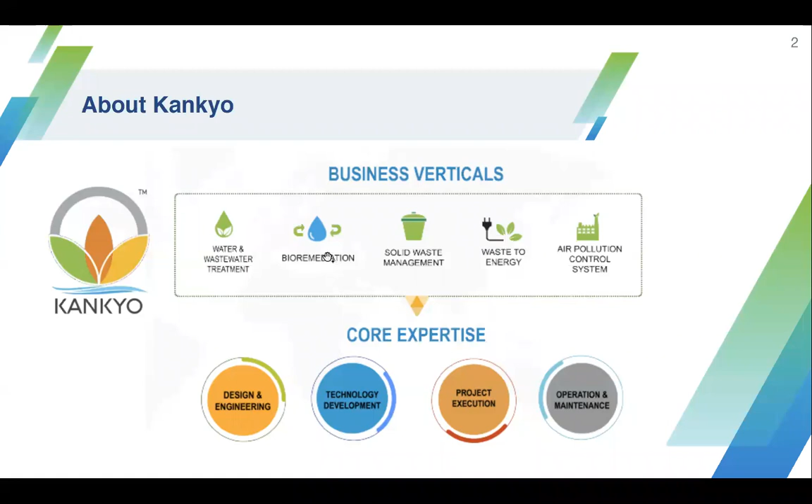Today my core focus would be on a few areas. I would be running through a little bit of basics on wastewater microbiology, because we are going to talk about smart solutions. So we need to understand how the microbiology works in wastewater treatment, and how effectively we can harness it for different streams of wastewater.

The other focus, when we talk about smart, is always connected to sustainability - that's energy optimization. How we could optimize the energy in the total treatment. We'll be talking about those aspects and approaches, and also about some technologies which you must already be aware of, and some which must be new to you.

We'll be talking about these technology approaches for different wastewater streams. Then we have smart monitoring and control of all these systems - the essential controls and remote monitoring which are essential for running this plant efficiently. So I'll be slowly going through these steps: starting from wastewater microbiology, then energy optimization, technology introduction, and smart monitoring and control.

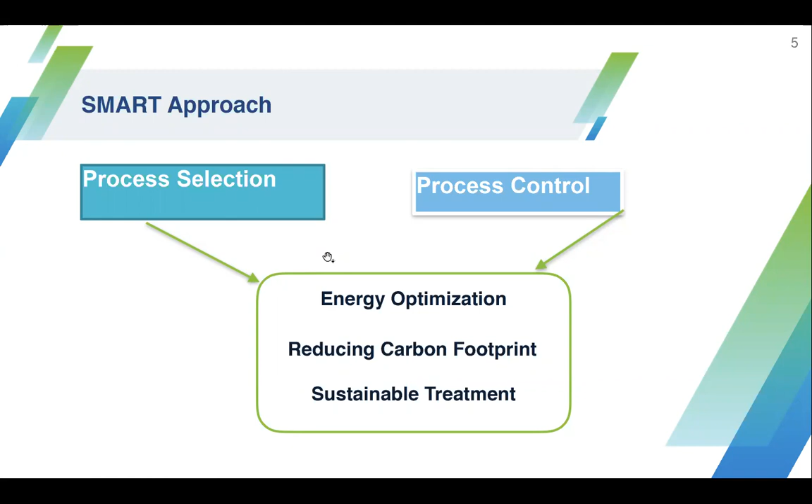The entire goal is to have lesser operational expenses, so reduce your energy consumption. Energy optimization is one of the core areas, and reducing the overall carbon footprint of the wastewater treatment system, ensuring consistent performance and achieving sustainable treatment. This is the smart approach we have to focus on.

Now, coming back to understanding the wastewater — the wastewater anatomy — it has different components. If you take a wastewater treatment system, it has a lot of mechanical stuff, and civil components in the form of tanks and foundations and all those things. Electrical is involved, instrumentation is involved, and chemistry and biotechnology, so it almost covers all engineering disciplines in wastewater treatment.

Each one is dependent on the other. If the mechanical system is not proper, it will affect the process. If the electrical system is not working properly, the process gets affected. If the instrumentation is not there properly, you cannot monitor the system. So all these things are interrelated, which are very much essential for any wastewater treatment system to perform well.

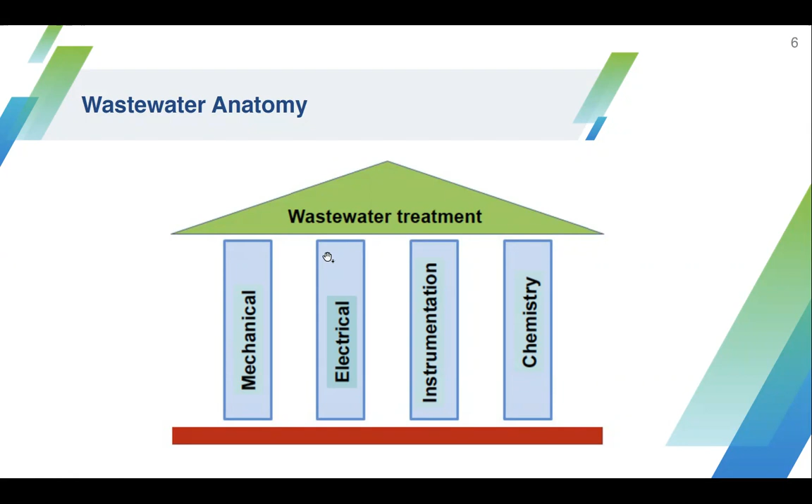Coming back to the families of microorganisms, there are a variety of microorganisms in wastewater application. We won't go deeply into the different types, but we'll just see the overall picture of what's available.

The broad classification is aerobic microorganisms, which are quite common. They need oxygen, and the pollutant is consumed as food along with some nutrients. The end product would be stable solids, carbon dioxide, and water. This is basically called the aerobic process.

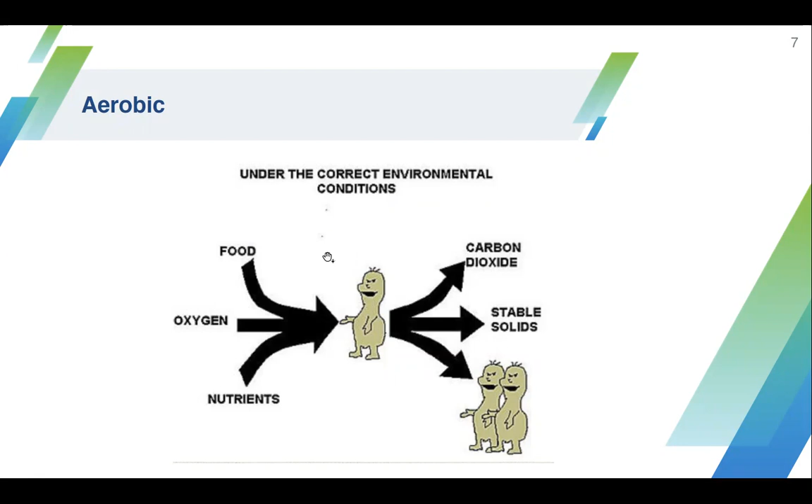The microorganisms thrive in an aerobic environment. Anaerobic is quite contrary to that, where there is no supply of oxygen into the system, entirely in the absence of oxygen. The microbes convert this food into methane, some solids, and carbon dioxide. This will be the end product for any anaerobic treatment system.

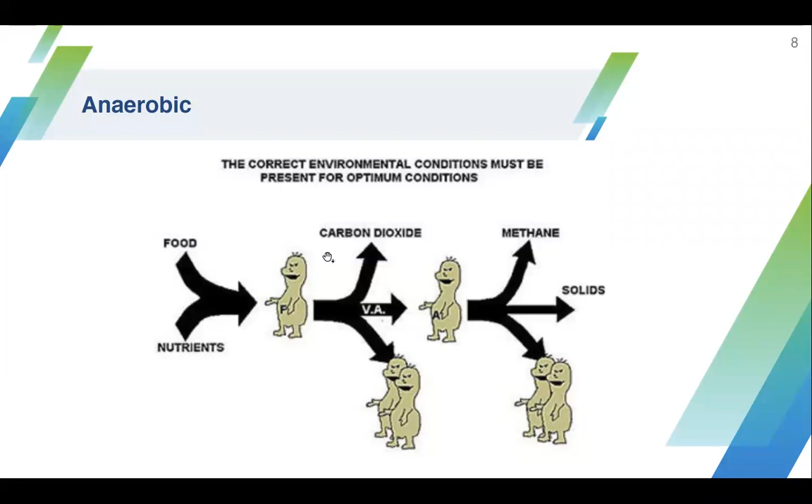In aerobic and anaerobic systems, anaerobic systems are pretty slow to stabilize, while the aerobic process is much faster in stabilization. When adopting these two technologies for a wastewater treatment plant, we have to see the limitations of both, because anaerobic microorganisms are very sensitive - if something goes wrong, the plant stabilization time takes much longer. So we have to properly evaluate the usage of anaerobic treatment systems, and the same applies for the aerobic process.

Facultative microorganisms can survive in both environments, aerobic as well as anaerobic. They need food, nitrates, and nutrients, and finally it gets converted into carbon dioxide, nitrogen gas, and some stable solids. These are facultative types of microorganisms.

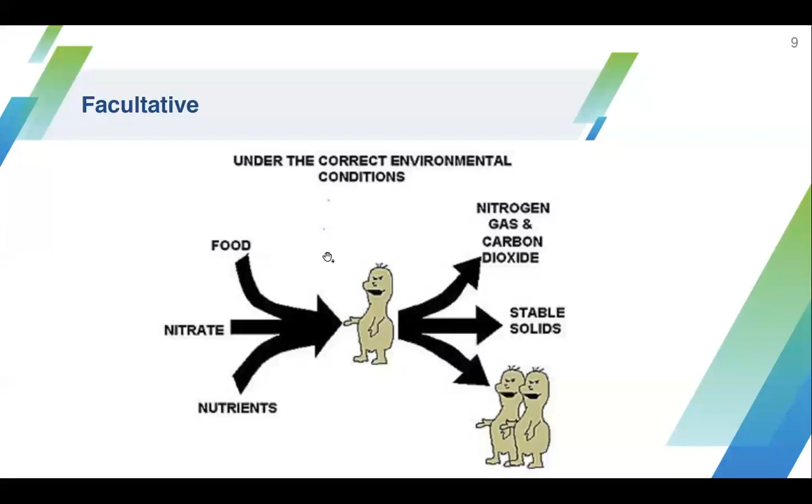If you look at the bacterium process, there are three steps involved. First is carbon intake and ingestion, since the basic molecule is carbon - that is the basic energy consumed by the microorganisms. This is used for a process called catabolic activity, which is breaking down these carbon chains and converting them into a final product of CO2, for which oxygen is also required. This path is what we call the catabolic path.

The energy generated in this process is utilized for the growth of new biomass, a process called cell synthesis, or anabolic activity, which also gives out a lot of heat. This catabolic and anabolic activity together is what we call metabolic activity. For balanced metabolic activity, both these functions have to perform well.

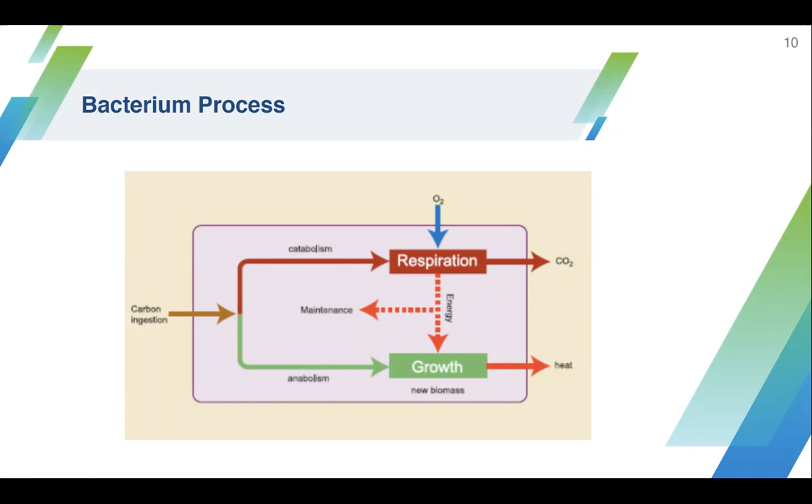As far as treatment is concerned, the aerobic process is a typical example where a lot of energy input is required in the form of oxygen for the aerobic microorganisms to survive, and a lot of biomass is produced. For around 100 kgs of COD, you get about 30 to 60% biomass based on the nature of the wastewater, and the rest becomes carbon dioxide and a lot of heat. It's an exothermic reaction, so there's a lot of heat loss as well.

There will be an overall very good reduction of organic pollutants like COD - from 100 kgs you can bring it down to 2 to 10 kgs. That's a major advantage. For anaerobic systems, from 100 we can bring it down to around 15 kgs, with lesser sludge generation. We don't require external energy in the form of oxygen since this happens in the absence of oxygen, and it gives out a lot of energy in the form of biogas, which is a fuel that can be used for thermal application or power generation.

We have to find hybrid solutions in certain wastewater treatment streams if the organic load is heavy. Assume you have a very high organic load - if you go only with an aerobic system, yes it works, using multiple stages of aerobic systems, but the energy consumption would be very high, making it uneconomical. So usually when the organic load is very high, you start with anaerobic microorganisms, because they are pretty hungry microorganisms and need a lot of organic load to survive.

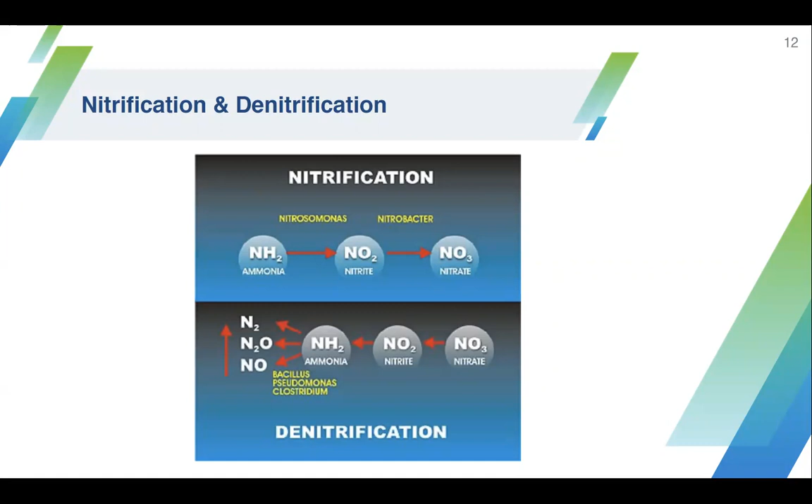There is another important one: biological phosphorus removal, mainly for the phosphorus or phosphate present in wastewater. You might have seen that much sewage, whatever is being treated, is let out into water bodies, and you see a lot of algae formation. This is mainly because of eutrophication, caused by high phosphate content, which mainly comes from the surfactants we use, mainly from detergents and soaps.

In everyday life, you use these detergents in vast quantities, and they get into the water bodies, because currently none of the treatment systems have phosphorus removal in India. This has become very vital, because now the water body is getting polluted, aquatic life is lost, and all those things.

So here again, there is a different family of microorganisms, a combination of anaerobic and aerobic microorganisms, which together can reduce phosphorus by biological means. Any anaerobic system, during fermentation, produces a lot of VFA, volatile fatty acids, and these are converted into energy rich products.

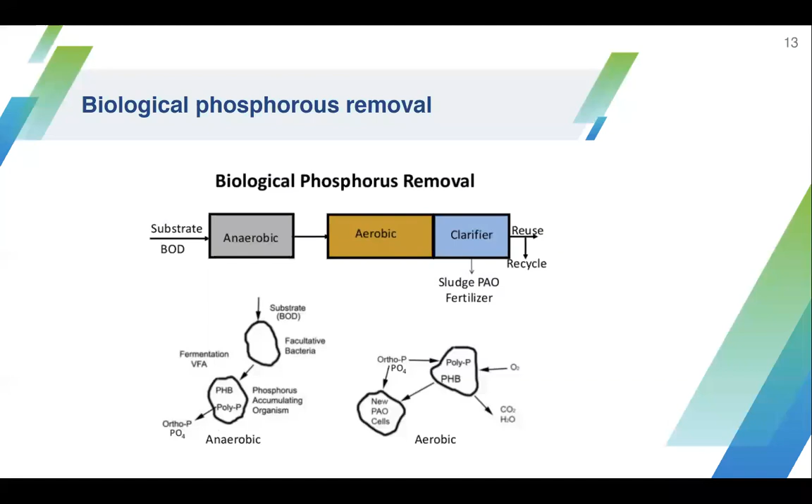So both these things put together, nitrification, denitrification, and phosphorus removal, we call this as biological nutrient removal systems. Not only BOD and COD, now in the European context BNR is quite famous, but in the Asian zone it is not quite familiar. Now many plants have to incorporate this BNR as well, biological nutrient removal systems, which removes the total nitrogen and phosphorus.

Now, if you see the growth pattern of any microorganisms in our wastewater treatment system, it goes through 4 phases. These are very, very important phases.

The initial phase is what we call the lag phase, where when you commission from day one, we call this the lag phase. The system, your microorganisms will get used to the pollutants. There'll not be increase in living organisms, but whatever organisms are present will try to accommodate to that particular environment. So this is called the lag phase.

Once the environment is quite familiar for these microorganisms, then it starts multiplying. This is what we call the log phase. You can see an exponential growth phase happening, which means there'll be a lot of growth of microorganisms multiplying. So here is the actual reduction of all your organic pollutants happens.

So this is what we call stabilization. When we start, we say that stabilization time is 2 weeks, 3 weeks, or 2 months, so that depends upon this phase. Now, once it reaches an optimum level, we call this the stationary phase, which means there will not be any further growth, there will be cell division, and there will be an equivalent number of death happening.

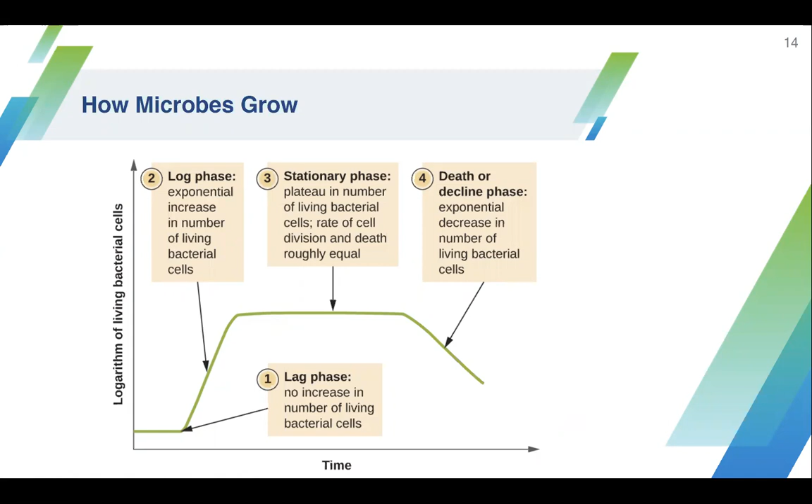So the faster you stabilize, the better, so you should go for the right process for that particular wastewater, considering the type of pollutant present, so that you can save on all this. We can make the process faster in some cases, and in some cases we can also optimize on the energy consumption.

So typically, if you take any wastewater treatment, it has to go through this scheme, where it will have a preliminary treatment to remove the screens and grits, and then a primary treatment to remove all the sediments, and then you go into the aeration system, where actually the BOD, COD, everything is getting reduced. In the secondary clarifier, sludge separation happens, and we activate the sludge back inside the process. Tertiary treatment contains the nutrient removal, biological nutrient removal, like total nitrogen and phosphate. And then tertiary treatment can also have other polishing systems like filters.

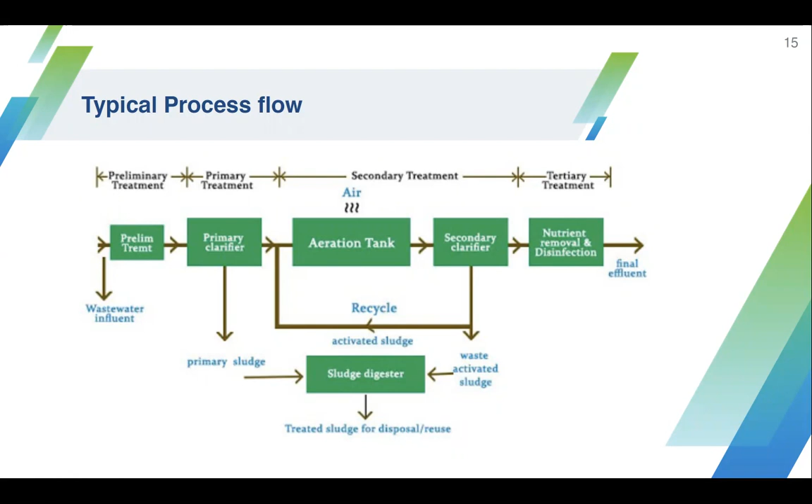And sludge which is taken out goes for disposal, or converting into a useful resource, or going for a sludge digester, where we can digest the sludge. Now, this is the new norms that we have in India now.

There was a lot of debate going on, but now the latest notification says that you have to comply, because many water bodies are getting polluted with heavy sewage inflow. It has been revised that ammonical nitrogen should be less than 5, total nitrogen less than 10, COD to the tune of about 50, and BOD up to 10 needs to be reduced. There's no mention of phosphate, but for water bodies it's very critical, so we have to bring it to less than 1 milligram per liter of total phosphates.

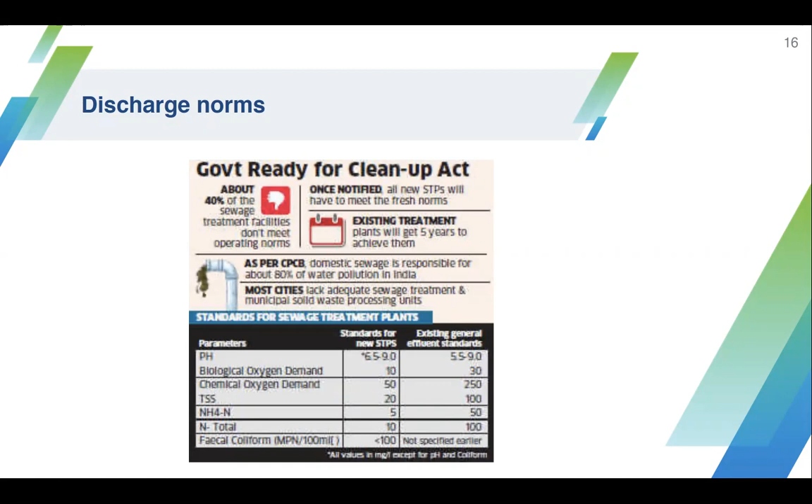Now if you see the energy spectrum in wastewater treatment, it's like this. The blue color one is for the aeration process, so 56% of the energy is consumed in the aerobic process. This is very vital, so you have to focus on this area so you can substantially save energy, or optimize it, because certain processes require that much energy, but we always have the option of optimizing energy consumption in this area.

Then you have the other pumping systems, and the dewatering stage. The violet color, about 7% of the energy, is consumed in handling the sludge - how to handle it, how to dispose it, dewatering and disposal, which becomes one of the important factors. Then there's the pumping cost - primary clarification, sludge pumping forms the rest.

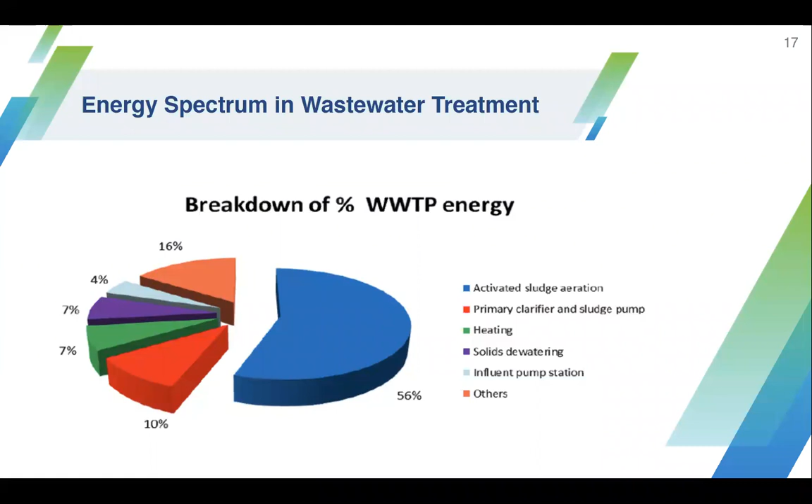So the core focus should be on technologies which could reduce energy, because this is very vital - it's not only cutting down expenses, it's also reducing the global warming potential, because the more energy you consume, the more CO2 you put into the atmosphere. So any treatment solution should also focus on contributing to the environment - not only reducing pollutant levels, it should also reduce emission levels, direct or indirect.

Now we are going into the next part of the presentation, where we are going to see about the various methodologies and technologies which can be adopted - simple solutions and simple technologies, and upcoming technologies which can be effectively implemented.

Now if you see equalization - whenever wastewater is collected, it goes into a collection tank. But it's not a simple collection tank, we call this an equalization system, because anything put into the tank should be homogenized - equally, because if you take an industrial scenario, wastewater can come from different processes, and each stream can have different types of organic loads. But whatever you feed into the wastewater treatment system, particularly the aeration process, should be a steady flow - only then do you get a steady output. Otherwise there will be a lot of variations, so you need to properly equalize the entire effluent within the tank.

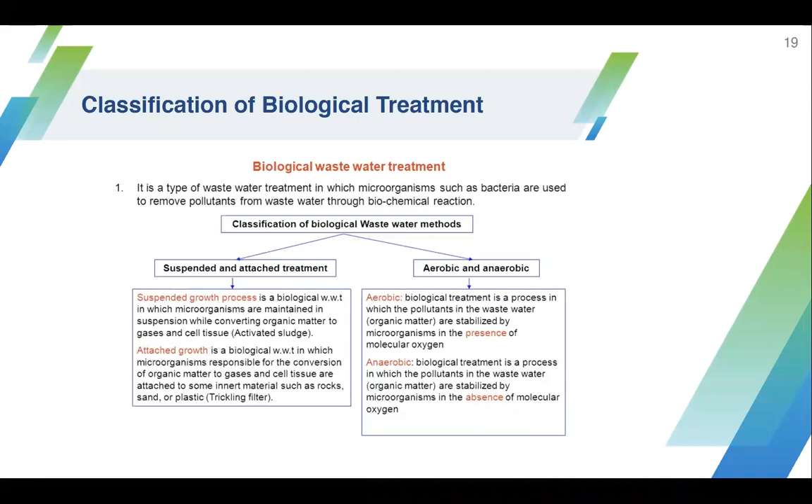On the types of technological approaches for different types of biological processes, basically we have only two broad classifications: suspended growth and attached growth. In suspended growth, microorganisms remain in suspension and consume the organic load, thereby reducing BOD and COD. In attached growth, the microorganisms are not in suspension, so they attach to a biocarrier and grow on that. These two types of systems can be applied for both aerobic and anaerobic processes, so broadly all technologies fall into this platform.

In the aeration process, we use many different types of diffusers, right from an ordinary pipe with perforations, which gives a very coarse type of bubble, to specific diffusers with slightly smaller coarse bubbles. Anything in the range of 3 to 50 mm is called coarse bubble aeration. Coarse bubble is mainly given for mixing, not aeration, because it has very low oxygen transfer—smaller the bubble size, better the oxygen transfer. Coarse bubble diffusers provide good mixing, whereas fine bubble diffusers may not mix well but have very good oxygen transfer. Within that, there are different types—up to 3 to 5 mm size, 5 to 50 mm, and over 50 mm—depending on the nature of the wastewater.

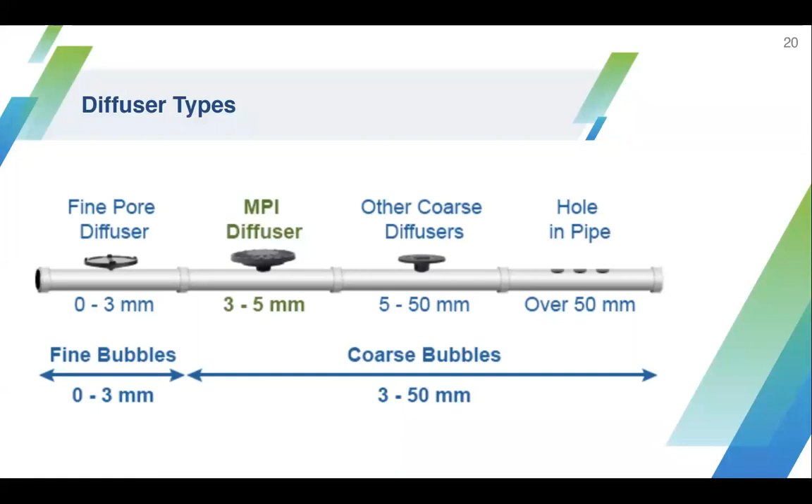Then comes the main aeration system, where people normally use fine pore diffusers with less than 3 mm bubble size, used for diffusing oxygen into the system. These are the basic diffuser types normally used. There are other systems like submersible aerators, which are different. These are all what we call EPDM diffusers, membrane-based diffusers, or a simple pipe with perforations.

In an aeration process, the control of air is very vital—you cannot put more or less air, as each has its own effect. If you put less air, the microorganisms won't survive and will die. If the supply is too high, too much bacterial growth will occur, and there won't be enough organic load relative to the microorganisms, so the bacteria kill each other and die. There should always be a sufficient air supply, so control of air or oxygen in an aeration system is very vital to determine the process parameters.

We may size the air blower or air compressor correctly, but it may still not perform well. It could be due to low organic loads, or excess air being pumped in—many factors are involved. So control of air is very essential in a wastewater treatment system.

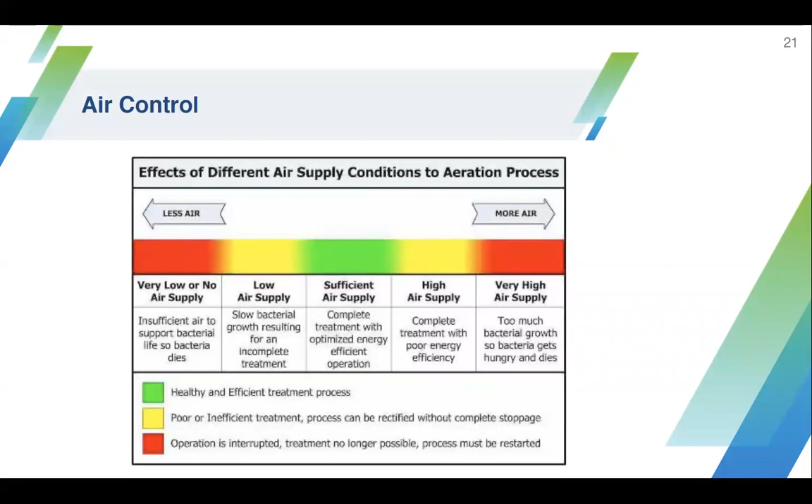Now here come some technological innovations called hydrodynamic aerators. Usually any aerators placed under water have to meet severe conditions, like scaling, clogging issues, and so on, and the replacement frequency is pretty heavy for all these diffusers. If you go for EPDM diffusers, they need to be replaced every year, otherwise you won't get the performance—you have to remove the old diffusers and put new ones in every year. So the life cycle of these types of diffusers is very short, which is where hydrodynamic aerators come in.

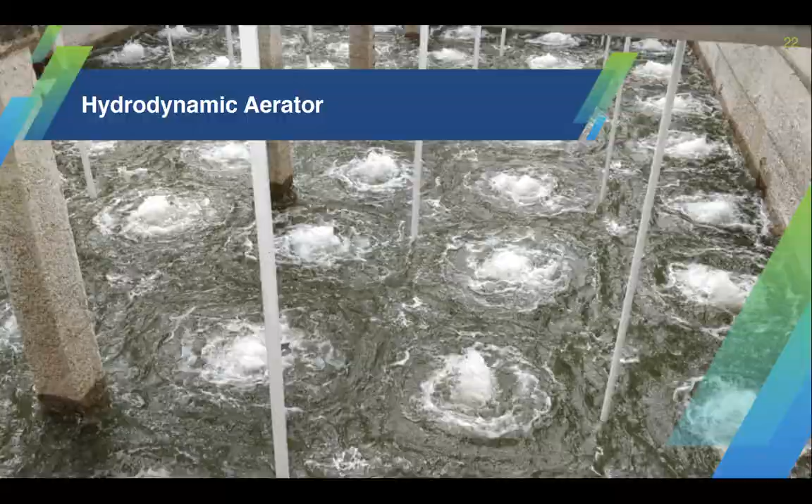Before going into that, there are a few problems I'd like to highlight regarding conventional diffuser issues.

If you see, it is like an elastic with small pores, so when you blow air into these EPDM diffusers, the pore opens up and bubbles are created which go up. Whenever the bubble rises, the water pressure on top pushes the bubbles, so there is additional strain onto the blower. Also, because there is a thrust happening in this area, there is a negative pressure created due to this lift, and the sludge also gets into it.

In course of time, this closing and opening, like an elastic band, has to regain its original position, but it will not happen. So at some point it gets clogged or it always remains open, and that's when we say this diffuser needs to be replaced.

What also happens is that when you start with fine bubbles, slowly it goes into a medium bubble, then it becomes a coarse bubble, meaning from 2 mm size it goes as high as 50 mm size. So effectively your oxygen transfer efficiency drops down drastically. You'll be consuming the same amount of energy, but you won't get the results because of this effect.

Many plants don't replace these things. They run for many years even if it's not working. If you just stand on top of the aeration system, you can see one part of the aeration is nice, the other part shows a lot of bubbles like a bomb explosion, which means it has already gone. It's just a vibrant turbulence you will see in that area, which means the tube got punctured, and they don't replace it.

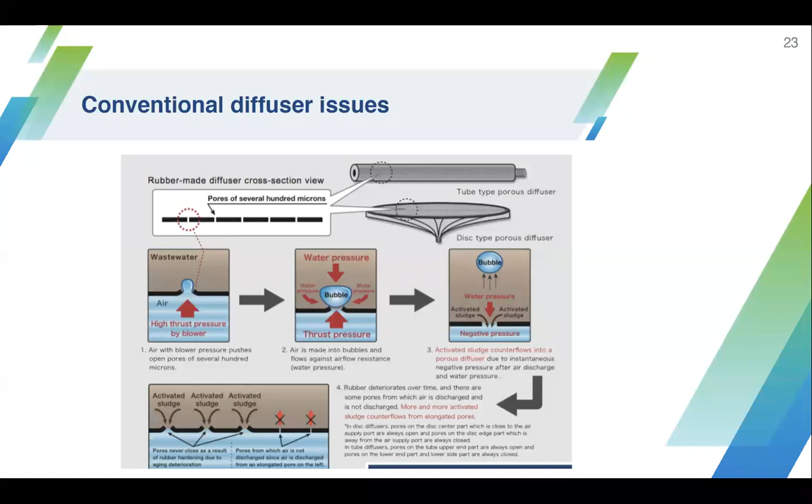Another important problem is when the plant is running, it becomes very difficult, because diffusers can be retrieved using a mechanism and all those things. But placing it in the right place will have complications, because unless you drain the tank, you cannot fix it properly. These are some of the practical issues with the diffusers.

There's also a lot of clogging which happens because of salt content or iron content present, and this puts a lot of strain onto the blowers. The resistance keeps on increasing, 200 mm water column every 10 days. So within 10 days or 1 month, everything is gone, and we have to throw these diffusers. If you try to use this, there'll be a lot of back pressure which will affect your blower. So a lot of issues keep coming in.

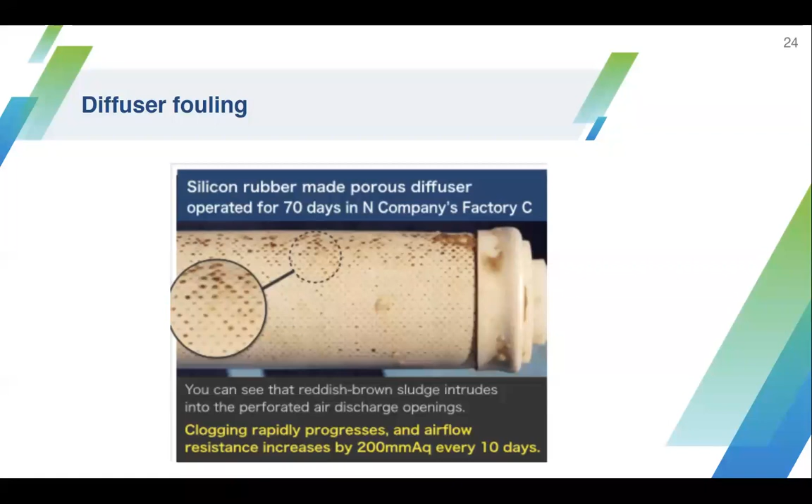Now, this is one of the innovations, what we call hydrodynamic aerators. Predominantly it's produced and developed by Suzuki from Japan. It's a very effective aerator, working on a different principle. You can see there is a big mouth cylinder with cross blades, which we call a guide vane.

When air is purged inside, this creates a lot of turbulence. Whatever you see on the top, we call mushroom buds. This creates a lot of ultra fine bubbles, meaning there will be a lot of micro bubbles as well as nano bubbles created, along with a lot of turbulence.

As I told you, any aeration system should have proper mixing and oxygen transfer. The fine bubble diffuser has very good oxygen transfer but poor mixing efficiency. Mixing is also very important in an aeration system, not only the oxygen transfer - the transferred oxygen has to be dissipated throughout the tank, and that is ensured only by active mixing. In this case, very, very micro bubbles are produced, and at the same time the turbulence created also gives very good mixing in the tank. That is the advantage of this particular system.

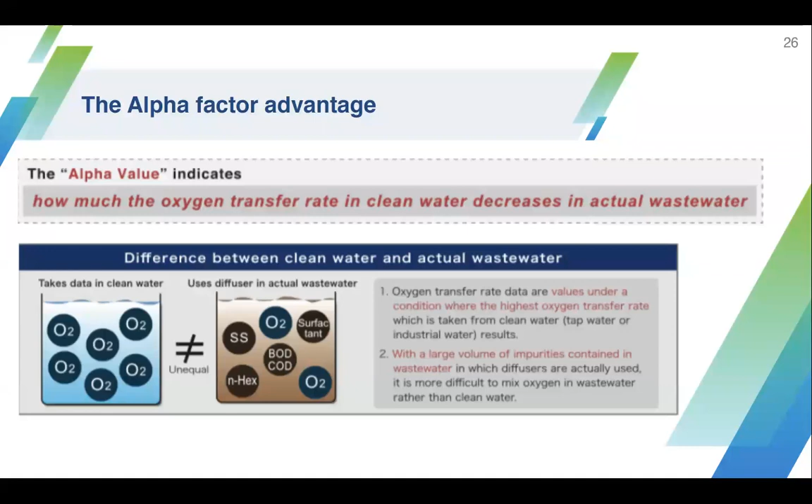For these hydrodynamic aerators, the alpha factor remains the same in water as well as in wastewater, so that is one of the main advantages. Whereas in case of other pumps or diffusers, it drastically drops down, it can go as low as 0.4 for different types of wastewater.

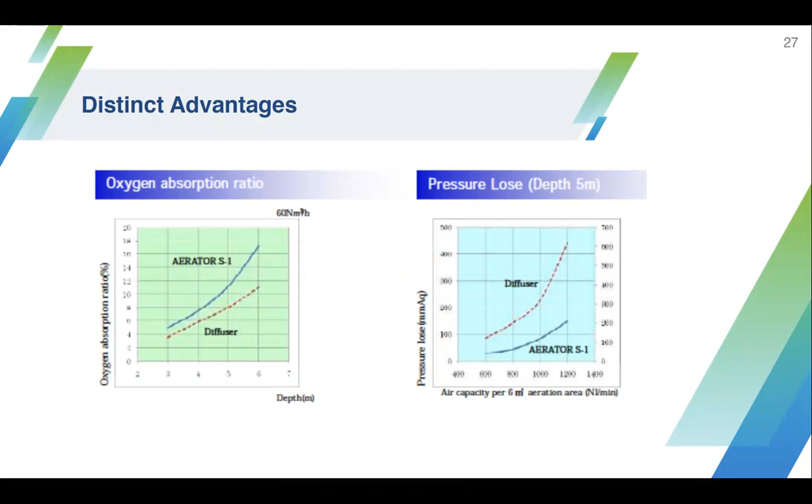Another distinct advantage is there is low pressure loss. In EPDM diffusers you have pressure losses, but these can be reduced when we compare to this aerator, and due to that the blower head size can be reduced, which reduces power consumption. There's also good oxygen transfer as you increase the depth, because one major advantage of these aerators is you can go for deep aeration systems, reducing your footprint.

So good oxygen absorption ratio, lower pressure loss, and longevity of this system, because once you put these aerators in the system, you need not replace them for the next 25 years. There are many plants working more than 25 years without any replacement or clogging, which reduces maintenance cost drastically. Imagine in 25 years you would have replaced all the fine bubble diffusers maybe 25 times. Though it is cheaper, if you calculate for 25 years, it would be almost 15 times or more the investment compared to this system.

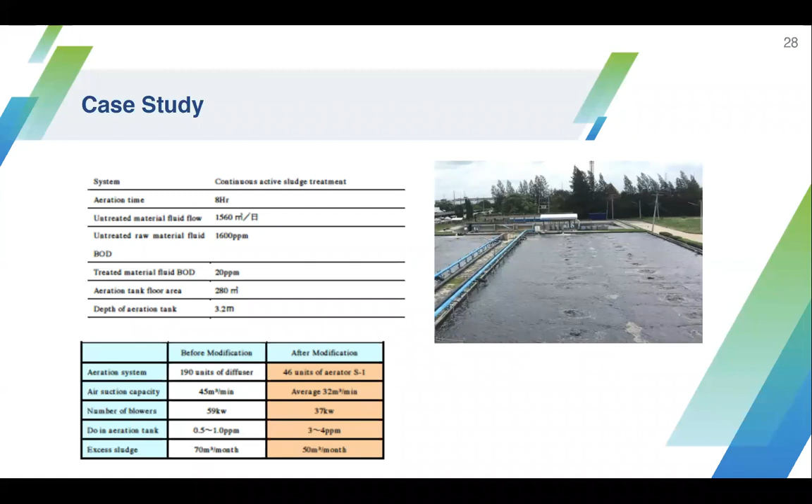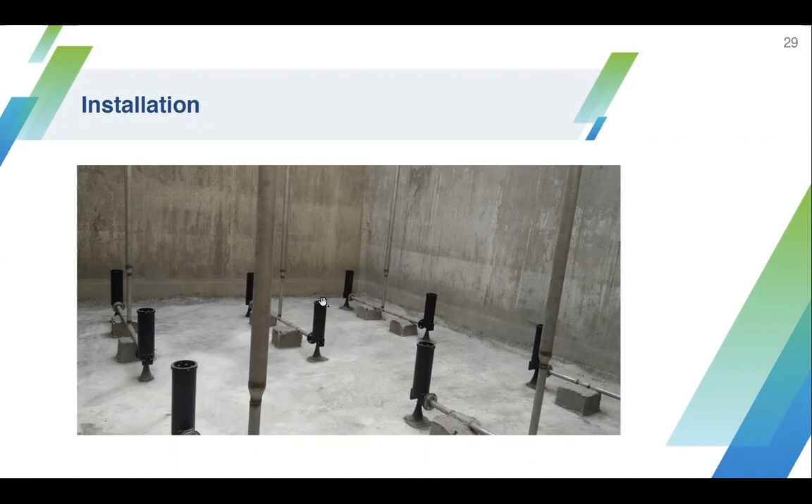So for any retrofit where you need an expansion or additional flow, we can retrofit with this type of hydrodynamic aerators, which are very simple to install and operate. These are typical installations, permanently fixed, and completely non-corrosive systems.

There are other microbubble generators which can also be a retrofit. So whatever we are talking about is a retrofit solution. It can be used in a greenfield project as well, but can also serve as a retrofit where you need to expand your wastewater treatment capacity or improve the performance of your existing systems.

Now, in many cases, like any aeration process, the tank should be deep, not shallow, because oxygen transfer efficiency, whether with conventional diffusers or any diffusers, improves with more liquid height, better performance. The oxygen transfer efficiency is directly proportional to the depth. So you should have very deep aeration systems, like 5 or 6 meters, that will be the ideal condition to get optimum oxygen transfer efficiencies.

Now, unfortunately, in many places in India, particularly for sewage treatment systems, they install it underground with just 2.5 to 3 meters liquid height or less. At that depth, there will not be any oxygen transfer. It simply wastes energy and money for operating the plant. Whatever you diffuse will just go into the atmosphere, like blowing air into the atmosphere. It's not really getting utilized.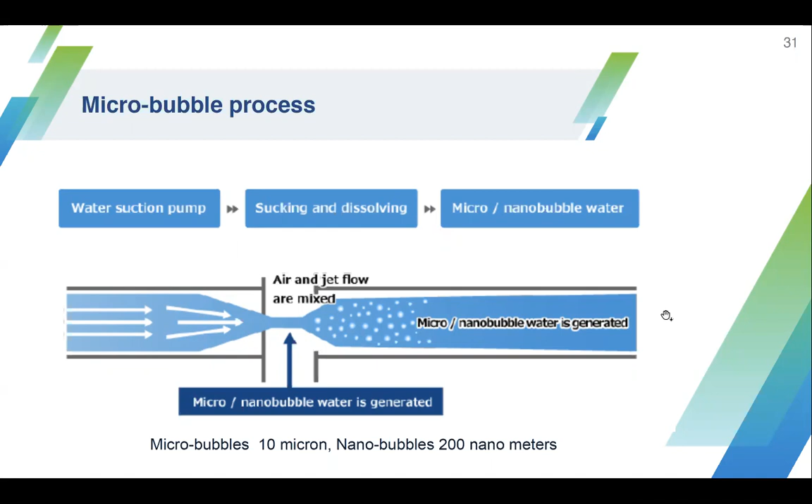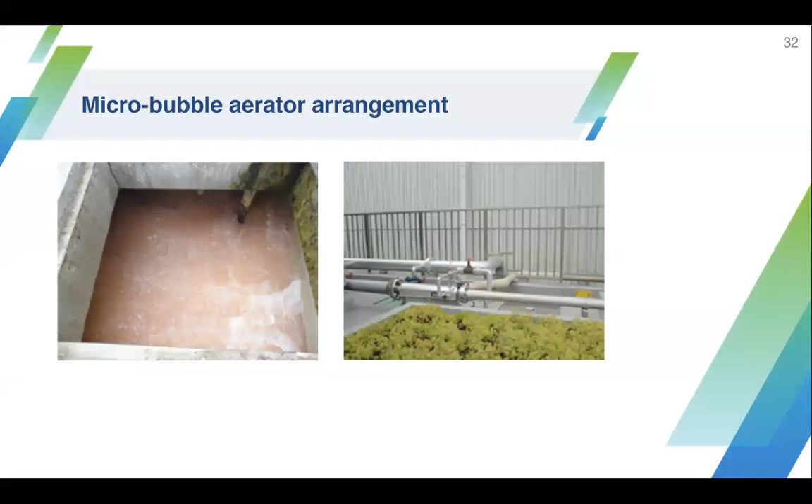So this can be effectively coupled along with your treatment process, which can be kept slightly outside, along with your blower. So it will have two combinations: the blower as well as the microbubble aeration arrangement. What you see is a dispersed growth. This is how the arrangement works, compared to the conventional system with just blowers.

Now where the HMB is introduced, it will dissolve around 160%, or 1.6 times, so improved oxygen dissolution happens here. Because of these microbubbles, more oxygen transfer happens, so energy saving is straight away up to 50%.

And if you see in shallow depths, with oxygen solubility using just blowers, for even 1.7 meter water depth, the oxygen solubility is just 2.7. It almost doubles when you go with this combination, to about 4.5. So this is one of the distinct advantages of this microbubble addition.

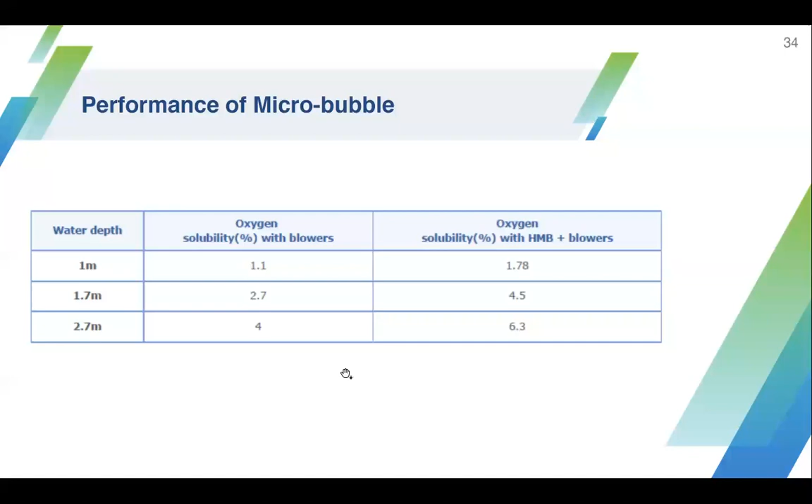Another important aspect of micro and nano bubbles is that they produce a dispersed growth of microorganisms. What is this dispersed growth? Normally in a suspended growth, you have floc formation - the flocs get formed around the microbial cell. What happens is the DO level, even if it's sufficient at this point, gets dropped by the time it reaches the microbial cell through the floc. So not enough oxygen gets into the microbial cell, but at the same time you need to increase this to improve the process. That is the main problem.

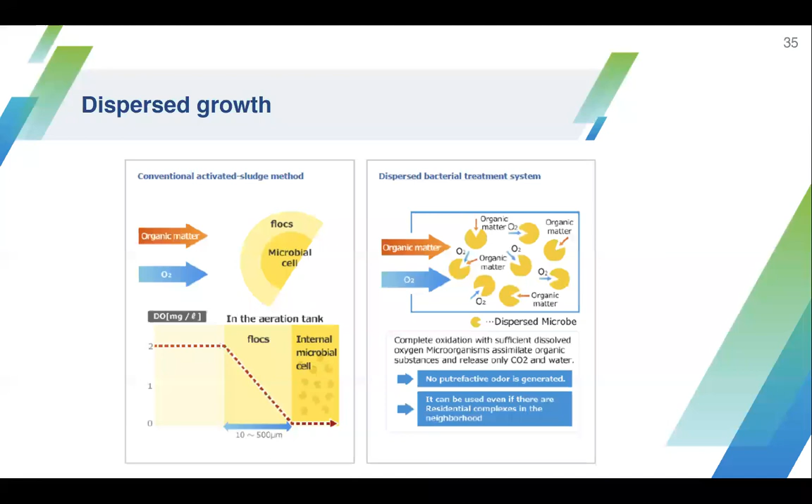But in a dispersed growth, there is no floc, so the organic matter directly gets into the cell. Throughout the aeration tank you see dispersed growth, and you don't require sludge settling and all those things. Directly the water can be pumped out, with just some filtration. All the organic matter gets dissolved. This is the advantage of these systems.

This is how it's a combined process, where you can see the HMB, a aeration tank - tank 1 and tank 2. This is tank 2 where we have the circulation pump, and the HMB can be kept outside. It picks up the oxygen from the atmosphere and puts it back, producing the microbubbles. And here we also have the conventional type of air blowers purging air inside.

So then further you can go for tertiary type treatments, and the entire sludge generation is also very, very less in these types of systems. So these are some of the innovations as far as the aeration process is concerned - smart technologies which can reduce energy consumption, and when oxygen is utilized properly, your sludge also gets reduced. So sludge wasting and expenditure on sludge management also reduces drastically.

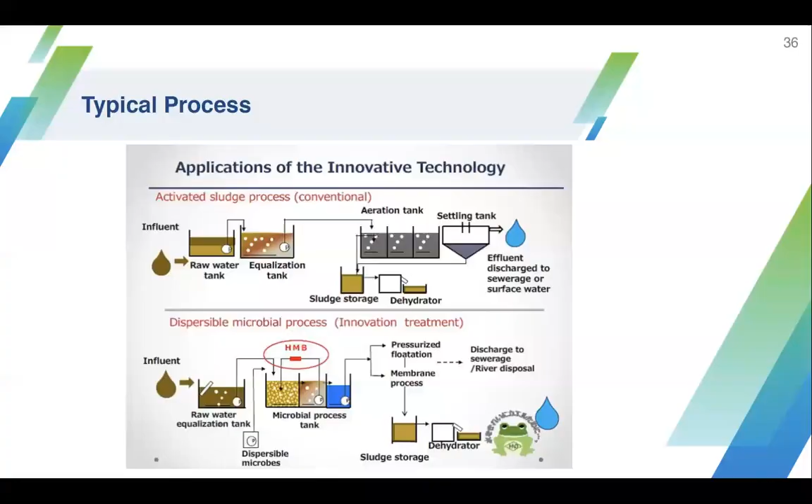Now coming to the biofilm reactors, these are some of the reactors which work on the attached growth principle.

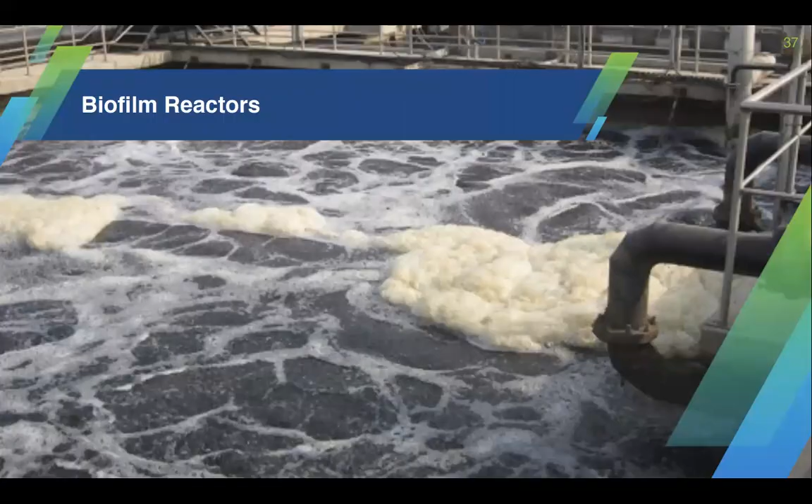Now, if you see this biofilm, as I told you, the microorganisms always try to attach to a surface. It's like dust settling on a glass surface. When exposed, all the dust gets settled onto the glass surface. In the same way, when microorganisms are exposed to a surface, they tend to attach and try to grow. It has various stages, because the attachment will not happen immediately. Whenever the microorganism comes, it will attach and detach immediately. We call this a reversible attachment.

So it takes some time to get attached to it. Then the excretions from the microorganisms will ensure that a cluster of microorganisms is formed onto the surface of this biocarrier. That's how it builds up. Once the accumulation happens, it comfortably sits here and tries to consume all the organics.

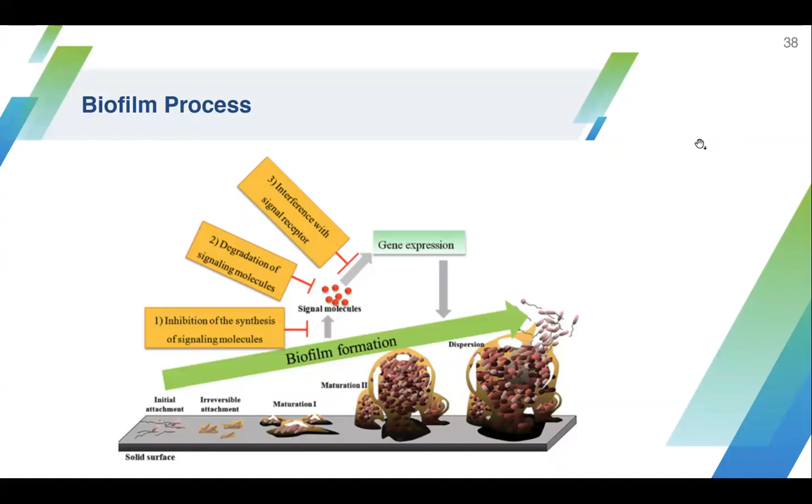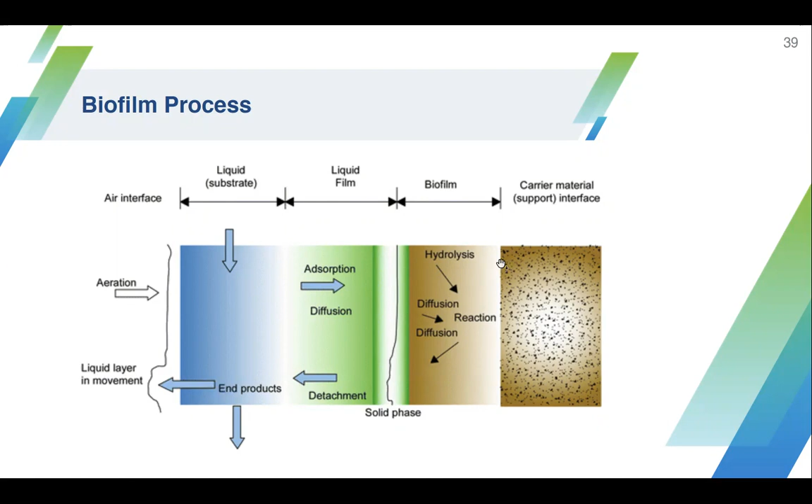So the advantages of any biofilm process as compared to suspended growth systems is it's very compact, because it can have very high bacterial growth, and it can also resist shock loads. This results in effective reduction of sludge. Sludge generation will be just 50% of the conventional activated sludge process, because a higher amount of MLSS is there, so lower will be the sludge production. You need not recirculate the sludge, so your energy cost could be reduced, and a consistent output can be achieved because of the high bacterial biomass. Once the plant is stabilized, it can work wonders.

In the market, you find different types of biocarriers, made of virgin plastics or virgin polymeric material, and different innovations have come, mainly of polyethylene or polypropylene. The white color you see is basically the virgin polymer, and the black color is not a virgin polymer, it's a mix of recycled polymer as well. These combinations are available in the market, and the strength depends on the type of system you adopt. The white one always has a better life because it's virgin, and the others do not, because they have 80% recycled polymer.

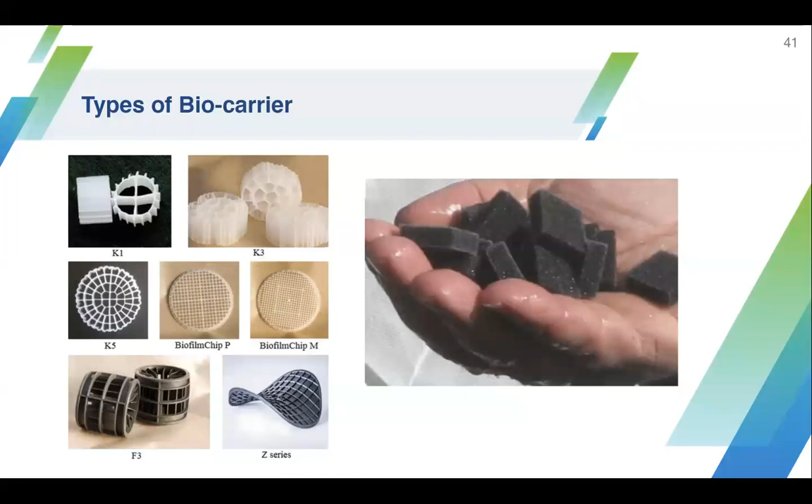So when it comes in contact, because of the fluidization nature, it smashes against each other, and it can also break, resulting in a loss of this media.

Now, under this biofilm, there is yet another great innovation which has happened, which we call carbon fibers. These carbon fibers are nothing but a fine graphite crystal structure, manufactured using carbonizing acrylic fibers. There's a special heat treatment process applied for this, and a special coating, we call it a PAN coating, on top of it.

These are the strongest biocarrier material available in the world now, about 10 times the strength of steel. This is the carbon fiber which is mainly used for building aircrafts, spacecrafts, and all those things. So you can imagine how strong these are.

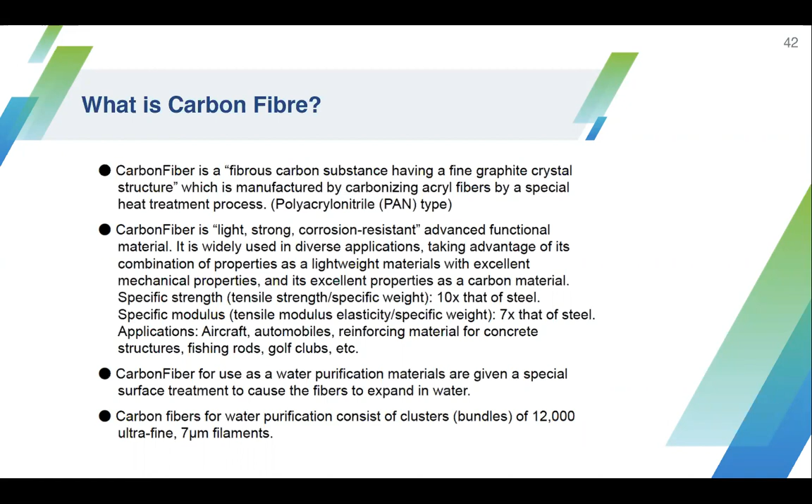These are like very thin hair, and if you take just one bundle, it will have about 12,000 ultrafine elements of 7-micron filaments. It's just like a hair, and it has a lot of surface area and other adhesion properties, which I will be explaining to you shortly.

Now, if you see this Mira carbon, it's just like a hair. You can see it can accommodate different types of microorganisms. On the outside, when it comes in contact with the water, it has a swaying motion and spreads like a wing. On the outside part, you have all the aerobic microorganisms, nitrifying microorganisms, and on the inside part you have all the anaerobic microorganisms, as well as denitrifying facultative type microorganisms, and all different types of families get accumulated in the same space. So the treatment would be very effective.

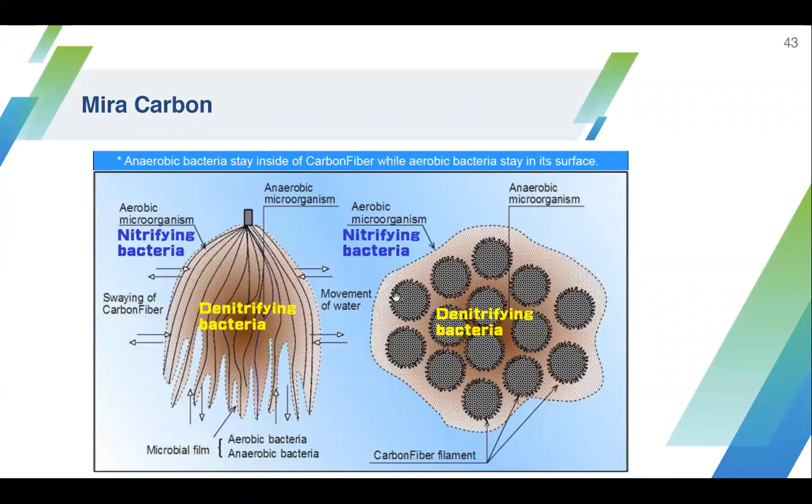Now, if you see, when it is immersed, it gets spread like this, and you can see the organic load getting accumulated and the biofilm formation on top of this media.

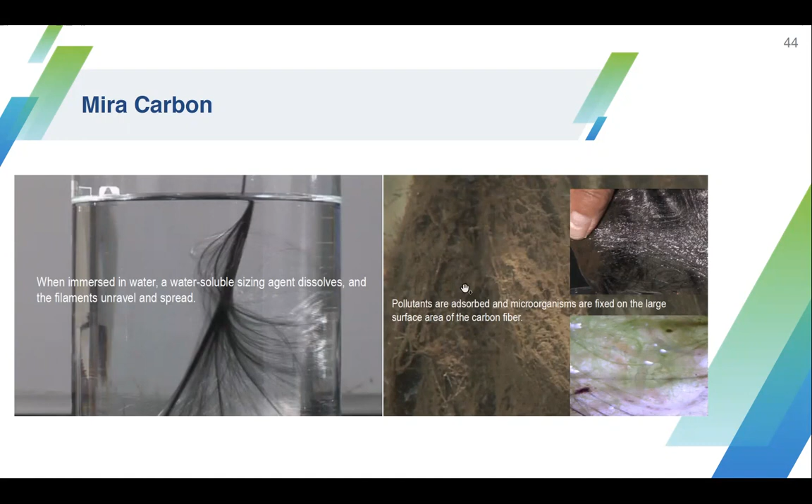Now, there are several media. Since everyone talks about total surface area, the effective surface area of the media plays a very vital role in determining the quantum of media which should be applied for that particular treatment process.

Now if you see the effective surface area, normally for any biocarriers, polymeric biocarriers, the effective growth happens inside. You can see here, inside the growth is very good, so 70 to 80% of the growth happens inside. Outside also it happens, but not that much. That's why you have some serrations on the outer part of the system, mainly to attach all these microorganisms. If the surface is smooth, nothing gets attached.

So there are two components. What we speak here is effective surface area and total surface area. Total surface area is the inner and outer surface area put together. Effective surface area is where the microbial growth happens effectively, that's called the effective surface area. So the effective surface area is only about 70% of the total surface area.

So when we design a plant, we say so many cubic meters, but it's not the cubic meters which counts. The entire thing revolves around what is the effective surface area. Whatever you calculate, you can consider only 70% of the total surface area as usable. Accordingly, you have to size your carriers, quantum of carriers, and your aeration system. So everything will have a cascading effect onto the process.

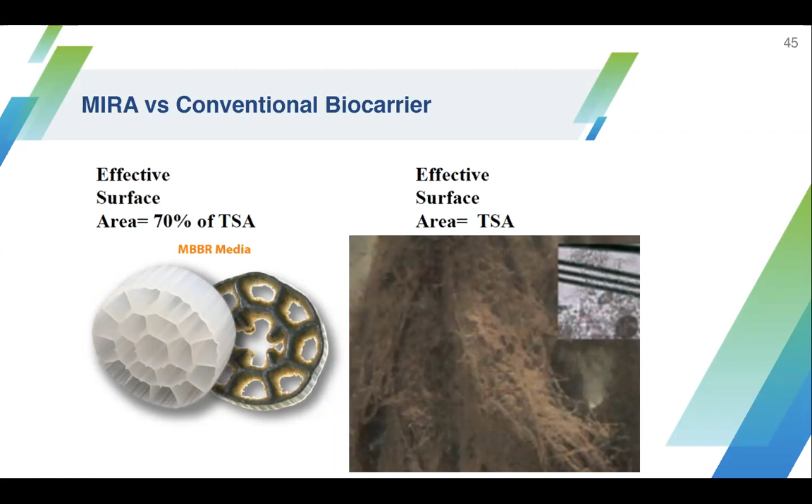Now, there is another important factor you should consider here, the zeta potential. The zeta potential is the surface attraction of any biocarrier material, and it is measured using the unit millivolt. If you see carbon fiber, it has about minus 10.7, PE is minus 34.5, polyacrylonitrile minus 24.9, polyamide minus 21.3. Most of the biomedia carriers available in the market fall in this range. Others are mainly polyethylene, with a zeta potential of minus 34.5.

Now how will this affect your system? It's very simple. The carbon fiber zeta potential is minus 10.7, negatively charged, versus minus 34.5 for others. In wastewater treatment systems, you have a lot of microorganisms, what we call gram-negative bacteria and gram-positive bacteria. Negative bacteria is negatively charged, positive bacteria is positively charged. With positive bacteria it's not a problem, it has adhesion, but predominantly it will be gram-negative microorganisms, which are quite important here.

These gram-negative microorganisms will have a repulsion, and their zeta potential will be somewhere around minus 18 to 20 millivolts, so these are very higher. What happens is it creates a repulsion. The zeta potential on the surface of the polyethylene is higher than that of the microorganisms, so it has more strength to repel. These microorganisms by nature will try to come and attach to the surface when it is exposed, so they have to overcome this repulsion energy and spend a lot of interaction energy to come and attach to the surface.

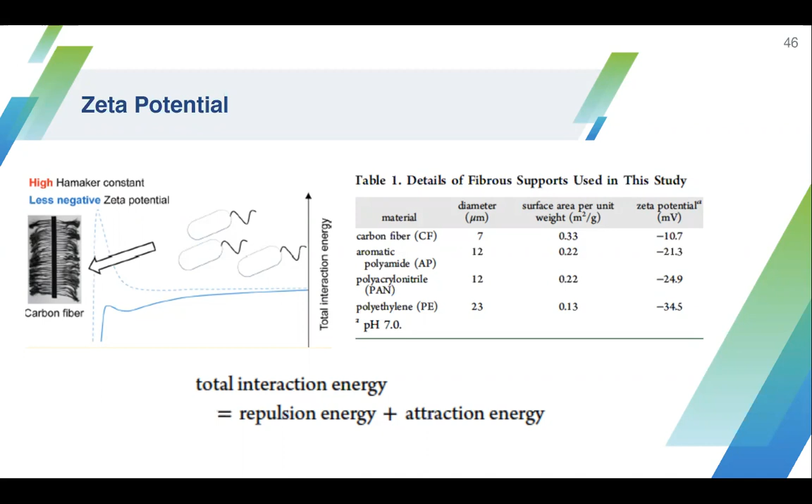So here what we are saying is we can accumulate more microorganisms, number one. Number two, faster stabilization can happen here. So that is one of the important things of this system, and it can accommodate any type of microorganisms. So one single reactor is good enough, you do not have to go for separate tanks like for denitrification and nitrification. So all can be combined in one.

Just by introducing this media, we can control BOD, COD, and your total nitrogen and ammonical nitrogen. So this is a major advantage, and to an extent, it also reduces your phosphate content. The total phosphate content can also be reduced.

Now, another major issue is the release of N2O. In most of the wastewater treatment systems, you will have this emission of nitrous oxide, because this is a byproduct when the denitrification process is happening and aeration process is happening, mostly in the nitrification process, ammonia nitrification process. So this N2O has to be properly converted into N2. If this is not happening very effectively, it will release N2O.

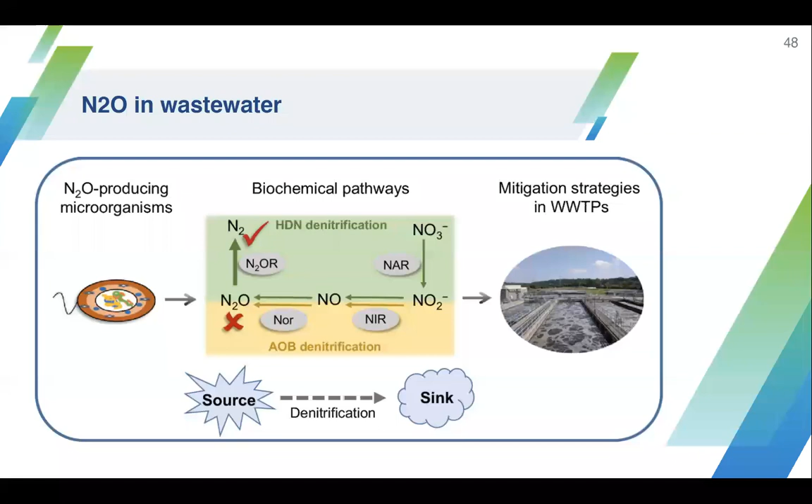That happens predominantly in a conventional process where there is not much microorganisms, because unless there is an environment for those microorganisms to grow, it will not grow. Whereas in case of the MIRA Carbon, there is a very good control on this N2O, because N2O has a higher global warming potential, around 298 times that of CO2. So you can also quantify how effectively you are cutting down the carbon footprint of your wastewater treatment system.

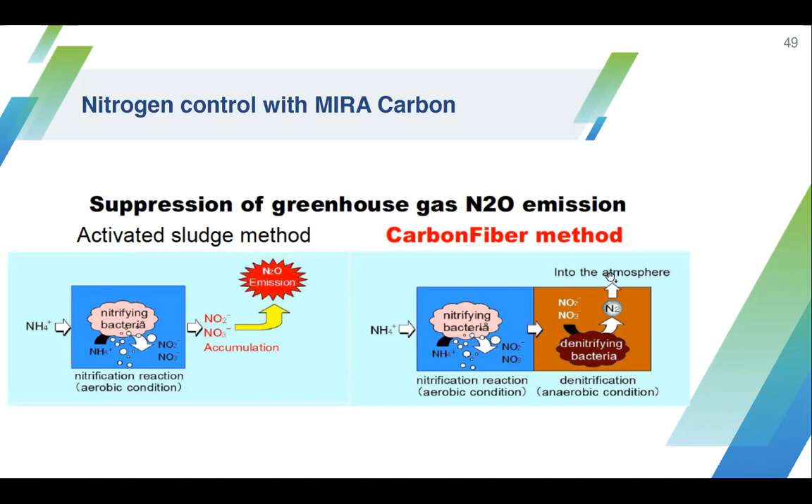You can see here the activated sludge. During the conversion process of nitrification, you also have a lot of N2O emissions which get into the atmosphere, which has a global warming potential. Here, by default, it will not allow this, because it also accumulates the denitrifying microorganisms within the matrix of the biocarrier, and only the N2 gets released into the atmosphere, thus suppressing the greenhouse gas N2O emission.

And also the phosphate. So in the earlier slides, I also explained about how an anaerobic and an aerobic combination can biologically remove the phosphate. The same thing can be applied here as well, because these microorganisms have pockets where anaerobic microorganisms grow, as well as aerobic pockets. So because of this combination, it can effectively remove the phosphate by biological means.

So one single biocarrier, which can accumulate different types of microorganisms, you can reduce your BOD, you can reduce your COD, and reduce your ammonical nitrogen, total nitrogen, as well as phosphate. This is a combination.

And one single tank is what is required, and a very effective biocarrier, which doesn't require too much mixing like in your other systems, because you also need higher mixing in fluidized bed bioreactors or moving bed bioreactors, because not only is oxygen transfer important, mixing is also very important. But here, because of the nature of these fibers, the moment you put them in, it will spread. So you don't have to have a very high turbulence inside the wastewater aeration tanks.

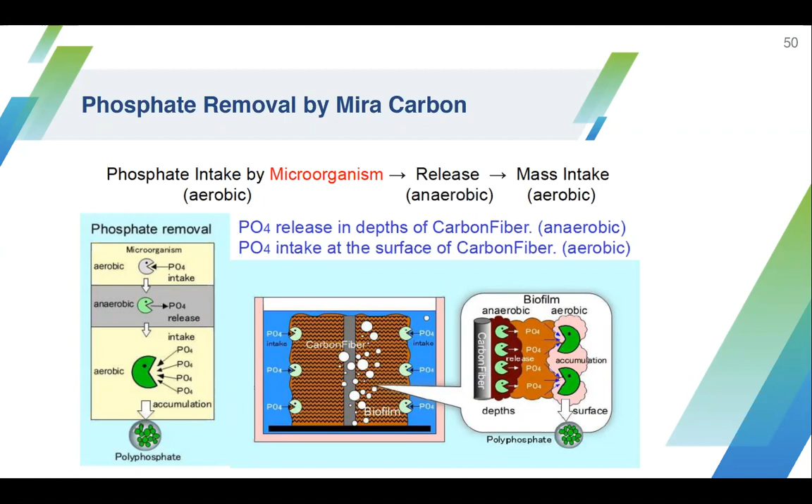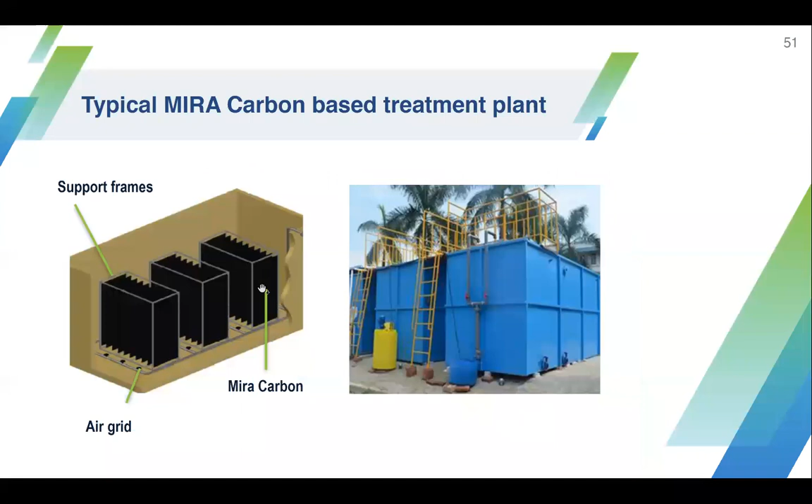So these are the typical arrangements, which can come as a package, or these modules can be retrofitted, which comes with the supporting frames, the air grid, and the biocarriers. So all put together will be the system.

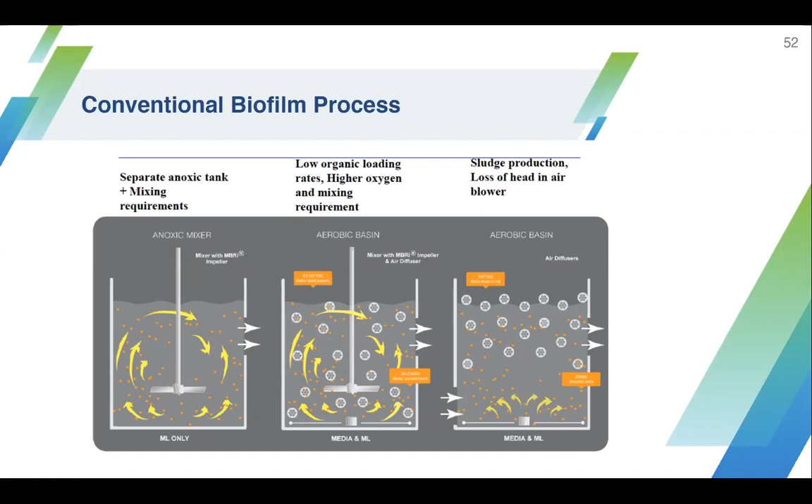And these are the savings we'll be making, because you can see that the conventional biofilm process has mixing arrangements here. You need separate anoxic tanks, then aeration basins. Now this part can be eliminated totally, so that you cut down on your footprint, cut down on the energy of this mixing as well. So this is the advantage of going for a Mira carbon based biocarrier elements.

Now, an extension of this, we can also use some other treatment, because as I told you, two things we need to focus on: one is energy reduction in the aeration process, number two is energy reduction in sludge management, because we saw that 7% of the energy is consumed in sludge management, in dewatering and handling of the sludge. So any process where we can reduce the energy in these two parts means we are cutting down a huge amount of energy expenses.

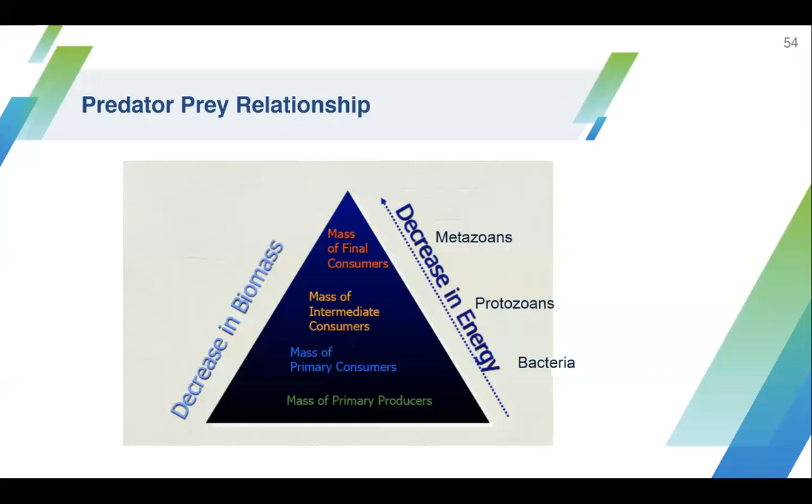Here what happens is the bacteria gets consumed by the protozoans. Now the protozoans are again consumed by the metazoans in the final stage, which means there's no sludge. Whatever comes out will be only inert matter, maybe suspended solids, and that's it. Other than that, the organic particulates are totally converted into CO2. So this is a multi-stage process. We call it a sludgeless treatment technology.

Now, in the biofilm, there is one more new development which has happened. Everyone must be aware of sequencing batch reactors. Sequencing batch reactors are the reactors where, in a sequential way, the entire treatment process happens in batches. That's why it's called sequencing.

They're introducing the biofilm reactor. How the changes happen is what we are going to see. There are different stages of SBR that have evolved. The basic one is a single tank, which we call the first stage of SBR. Then we have a cyclic activated sludge process as a second generation, then continuous flow SBRs. These are different forms.

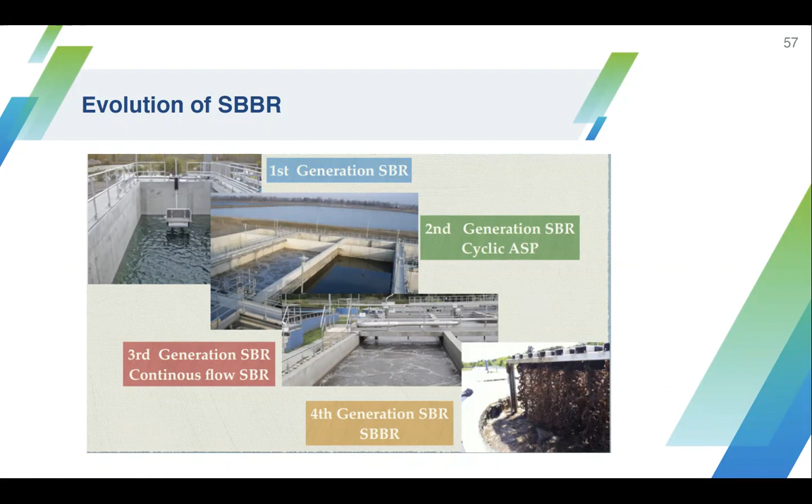And now the fourth generation is when the microbes are attached to the surface, and we introduce a biocarrier. It's called a sequencing batch biofilm reactor. It has various advantages of high biomass concentration, high sludge retention in a very smaller space, smaller reactor, which means reduced footprint and improved efficiencies.

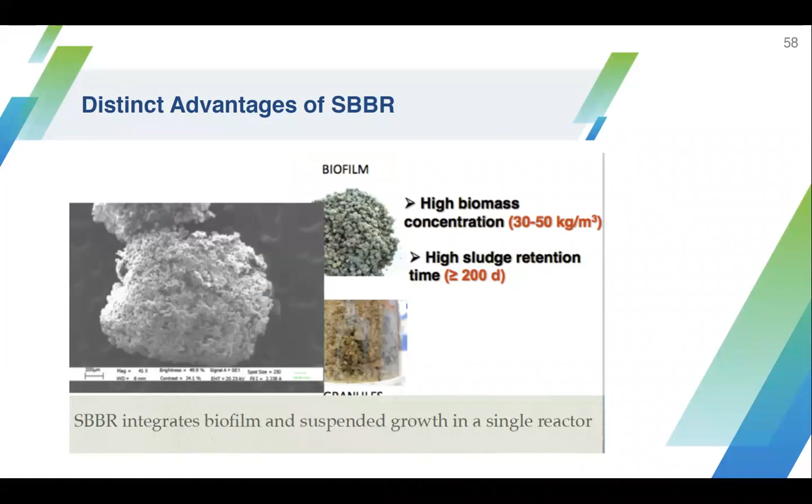Now, this sequencing batch biofilm reactor is coupled along with an intelligent control system. What this intelligent control system does is, here you need not operate the air compressors on a continuous basis. We'll have control on the DO levels, and thereby use only circulating pumps - the circulating pumps and air compressor combination.

So you know that you have a filling cycle, an aeration cycle, a settling cycle and a decanting cycle. Here, accordingly, we alternate between the air compressors and the circulating pump by measuring the DO levels. That is good enough to have an energy saving of up to 50 to 56%, and very good COD removal to the tune of more than 95%. That is achievable with this sequencing batch biofilm reactor.

The advantage of this sequencing batch biofilm reactor is also that it is very compact, unlike an SBR system where it requires large tanks. This just requires only one-third of the tank size required for a sequential batch reactor.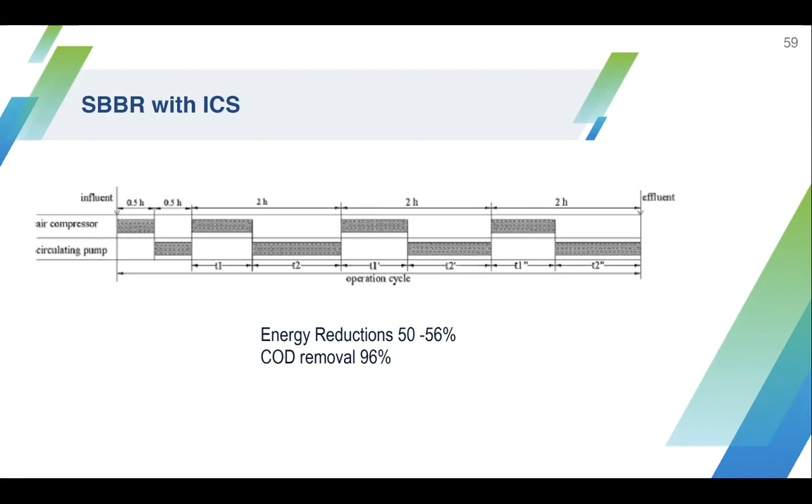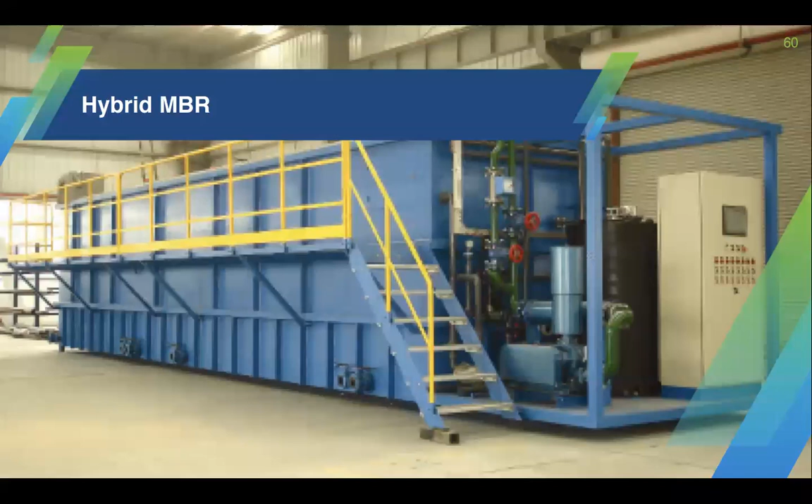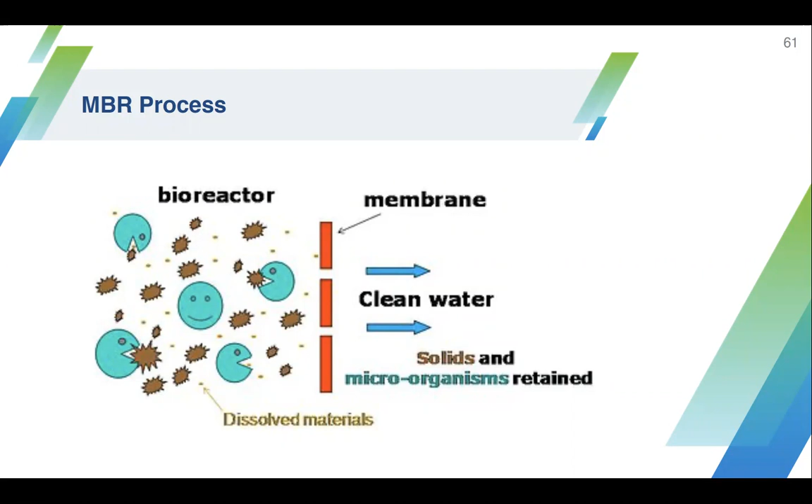Now, the other stage is your hybrid membrane bioreactors. The hybrid membrane bioreactors predominantly combine the biocarrier with membrane bioreactors. Membrane bioreactors, most of you must be aware, are a high-end process where we use membranes in the biological process, which can effectively filter out the microorganisms and solids that remain in the system, and only clean water comes out. So a biological concentration of the microorganisms happens within the reactor. At one end, you get the clean water.

Now, here we have different types of MBR treatment systems. When the membranes are kept outside, from the aeration tank you can just pump and concentrate the sludge and put it back. You can get a very high bacterial biomass here, which can effectively reduce your footprint of the aeration process, as well as reduce high amounts of organic pollutants. The other reactor is where you put it inside, submerged inside the aeration tank itself. These two configurations are available worldwide. Many treatment systems function this way, but we need to select the right type of system based on the application - both have their plus and minus.

Here you see the energy pattern consumed in the aeration process is less, but the pumping cost is very, very high. In the same way here, we see the energy costs are very high, but the pumping costs are less. It's quite contradicting for both. But the end quality would be very, very superior - so very good in both these systems.

So wherever there is a zero liquid discharge type of system, where you have to go for a biological process followed by reverse osmosis, in between, you need not go for an ultrafiltration.

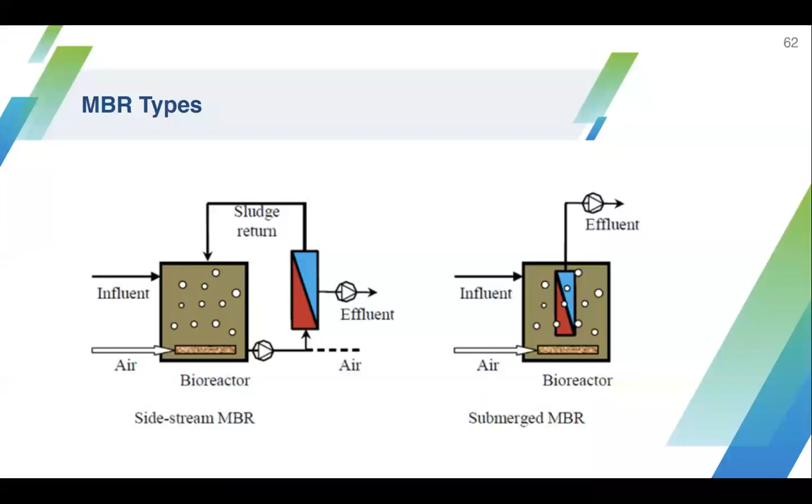You go with the MBR based biological process, so that effectively the water can be directly sent to the reverse osmosis plant, and we can carry out the zero liquid discharge process.

Now, one more advancement in this system is that the only problem associated with this type of systems is the higher energy consumption and the cleaning frequencies, because the membrane gets fouled and we need to take it out, go for a cleaning regime, and put it back.

So if the membrane needs cleaning every 30 days, now you can clean once in 90 days. You increase the life of the membrane, and you don't spend energy and other operational expenses on cleaning, and you get a very good consistent output as well. So this is the combination you can also adapt for a hybrid MBR, and overall capex also reduces to some extent when you go with this combined system.

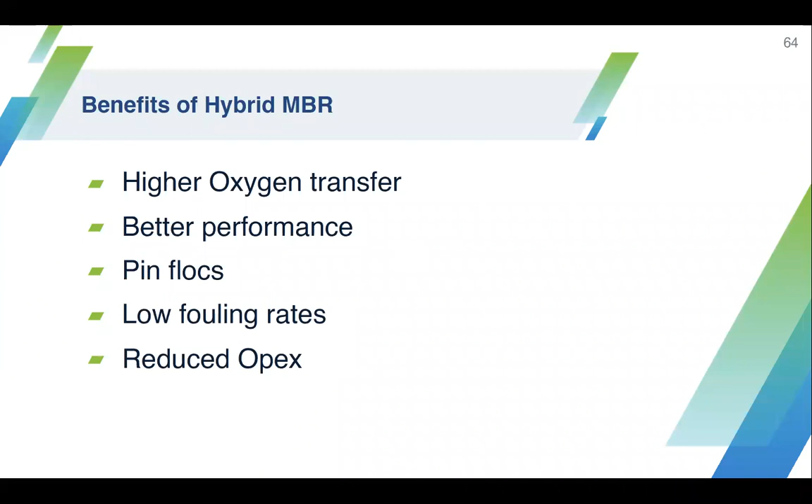So with pin flocs, yes, you get higher oxygen transfer and better oxygen performance, lower fouling rates, and reduced operational expenses by combining this biofilm with the MBR. So this can be effectively utilized or retrofitted with the existing MBR treatment systems.

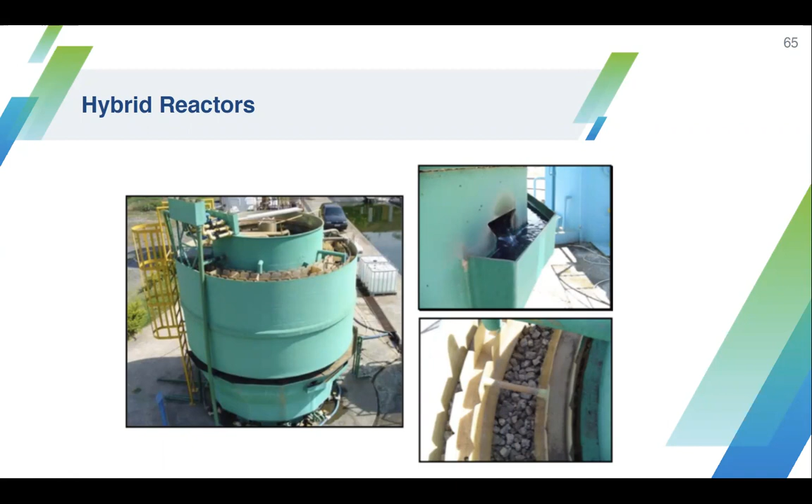The other form of hybrid reactor is a combination of aerobic and anaerobic treatment systems, which can come as one single reactor, basically for sewage treatment, domestic sewage.

These type of systems are very, very effective, where you see your UASB, upflow anaerobic sludge blanket reactor, coupled along with your aerobic biofilters, all in one single tank. You just have to pump in, and whatever sludge is being produced is again taken as an intake to the UASB, because the anaerobic microbes can work on this sludge.

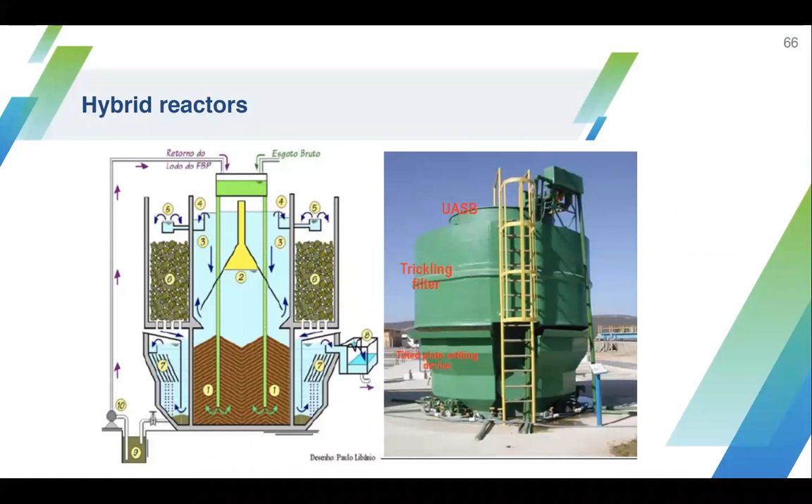So absolutely the sludge production is very minimal in this process, with a lower footprint, and this combination of hybrid anaerobic and aerobic will reduce your energy needs as well. So this type of hybrid reactor can also be adopted for domestic sewage and for other industrial wastewater.

So these are the technologies. Whatever we saw so far is on the different technology approaches focusing on energy reduction and optimum performance of the system, mainly focusing on aeration and sludge management.

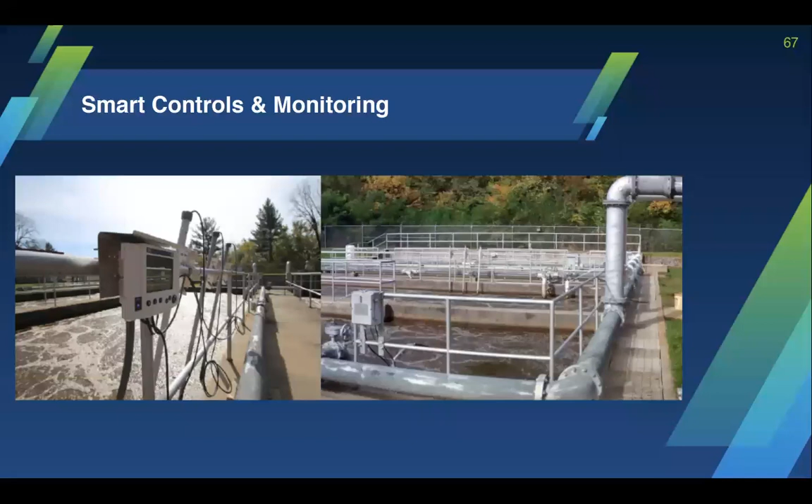Now, the final part of this is your smart controls and monitoring, and how smart controls and monitoring play a very, very vital role in reducing energy consumption.

Now, one of the important parameters I mentioned in the first slide is that most of the treatment systems which are designed will either be over designed, or sometimes practically when you operate the plant, you get a lower organic load. These things you don't have control over.

Let it be sewage also, sometimes it will be a lean organic load, and sometimes it will be heavy. But what happens is that when we put an air blower, it keeps on pumping oxygen into the system irrespective, meaning it's working blindly. So whatever comes in, it puts the same amount of energy into the aeration system.

Now, when this is controlled by a DO meter, because the main parameter which decides the aeration performance is the dissolved oxygen sensor, DO - the DO level you have to maintain inside - if you maintain that amount of DO, that is good enough.

So when your organic load is higher, the DO drops down. When the organic load is lower, the DO increases. So by maintaining the optimum DO set point, your blower can be adjusted. You just need a DO sensor coupled along with a variable frequency drive, which will fine tune the blower, so you need not spend that much energy.

So energy saving can be up to 15 to 20%, and in many cases we have seen higher, this differs based on the flow patterns and organic loads, but the minimum guarantee is up to 15 to 20%. You can easily have an energy saving on this.

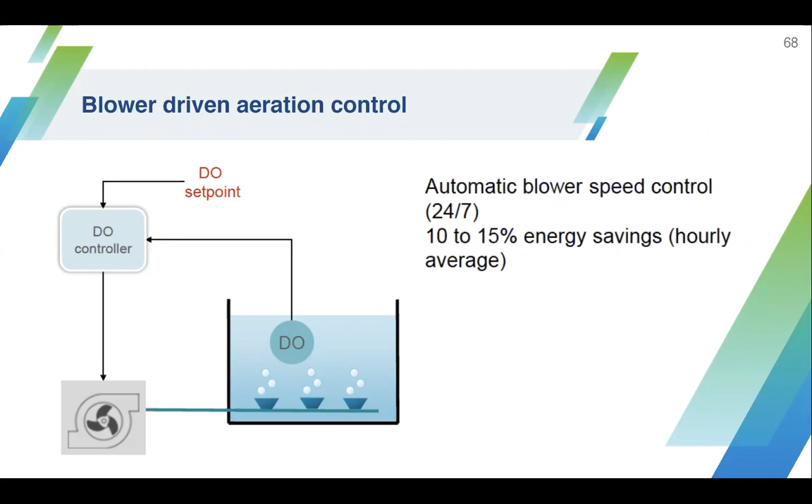And next one is on your sludge, because whenever you go for the conventional treatment process with recirculation of the sludge, this is one area where we should know when we have to waste the sludge. The more sludge you discharge, the more your sludge management costs and energy consumed in sludge management is going to increase drastically. So you can always have an MLSS.

MLSS is a measure of the mixed liquor suspended solids in the aeration tank and your TSS. So MLSS divided by your TSS gives the SRT, that is the solids retention time. Once we fix the solid retention time, the system can automatically discharge the required amount of sludge based on this set point.

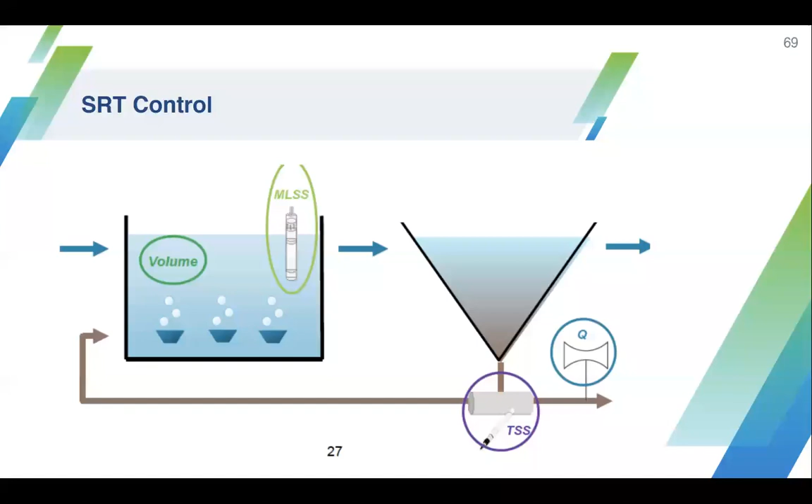Because if you start wasting more sludge, your biological system gets affected. Manual control is very, very difficult. Now, many places, mostly it is done on manual mode. So an enormous amount of sludge goes into the sludge management process, discharged out, and they're unable to maintain the biological and bacterial concentration in the aeration system. So a proper SRT control with these two instruments would be very beneficial.

And also you have control flexibility, because you can always set the MLSS and your SRT are variable factors which can always be set. So that flexibility will be there, and you can operate the plant as per the demanding needs at a particular time frame. This control flexibility is not possible with manual operation, particularly for large scale plants.

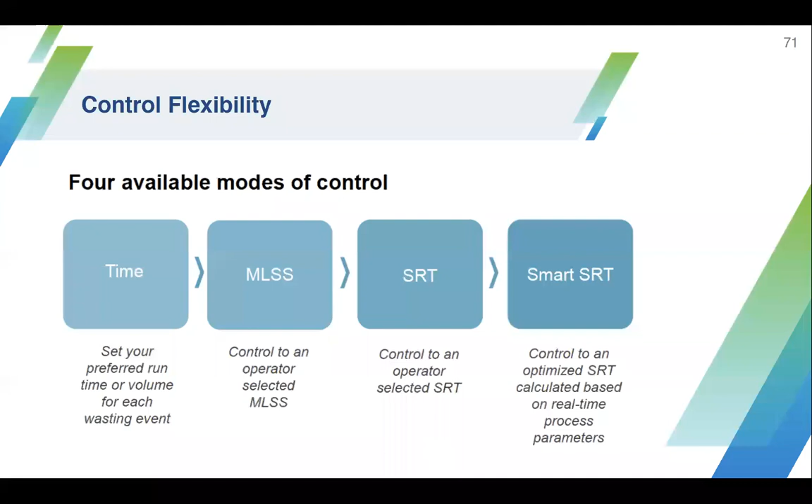Now, if you see why this monitoring and control is needed, as I told you in the beginning of this presentation, this control and monitoring is very, very essential, because I should know if something is going wrong, what went wrong. So if you have a monitoring system, all the information can come to your cloud platform and to your system.

These are the parameters normally which can be tested: flow level in the tanks, pH, total suspended solids, BOD, COD, total nitrogen, total phosphate, MLSS, DO, temperature, and ORP.

So I just classified it as monitoring. Certain things you can have the option of just monitoring and leaving it. Just to know how it is, what is the quality of treated water, you want to see it online itself, then you can have this type of monitoring system.

In some places, it becomes monitoring and control. Control means it gives energy optimization based on, for example, the MLSS, the DO levels, it can have total control on the aeration. And ORP on your disinfection, they can have total control on the dosage of chemicals using this.

So all these parameters can be tested, monitored, and controlled from a remote location as well, saving a huge amount of energy and operational expenses.

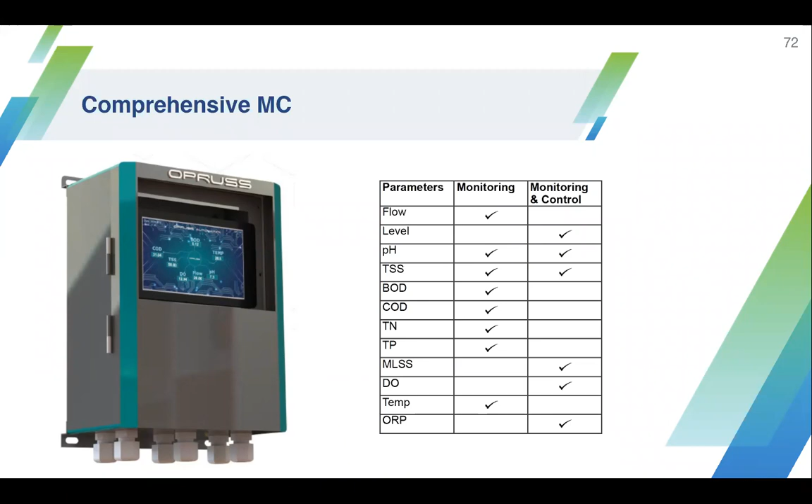Now, the final part of this is that apart from the smart controls, we can also derive energy from a large scale sewage treatment plant. When I say more than 50 MLD, there's a huge amount of energy which can be produced from the biogas which is generated from the sewage treatment systems.

So primarily the large scale is an activated sludge process and extended aeration process, where we have the primary settling and activated sludge treatment and secondary settling. And you have a lot of sludge being produced, going into our secondary sludge as well as the primary sludge. Both are taken into anaerobic digestion, which can produce energy.

So by calculating this energy and mass balance, this can substantiate 50% of the energy needs required to run the sewage treatment systems. By having proper sludge management and capturing the solids, we can generate energy through the biogas, and we can utilize that energy for running the treatment plant. So 50% is pretty huge just by capturing this.

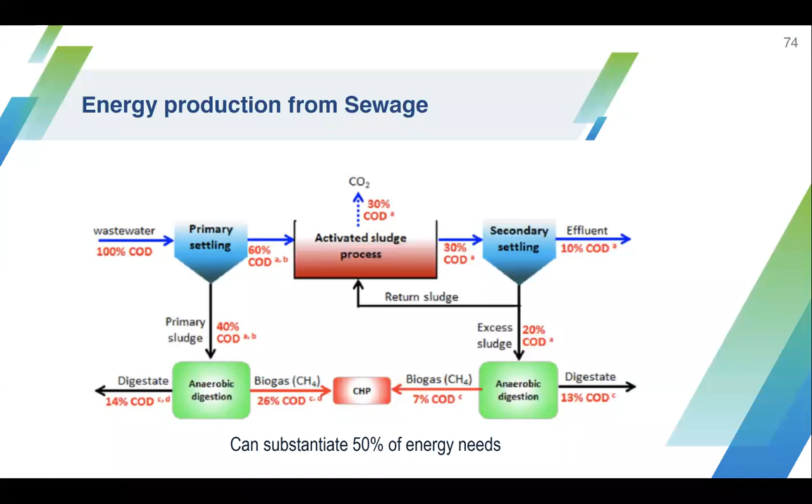Then imagine you put all the other controls and other things, you can still save another 15 to 20% of energy by having DO control and SRT control and all those things. So effectively you can hit about 70 to 75% of overall energy needs that can be controlled.

And the other approach also, now what we are seeing is a higher energy output from the sewage, where the sludge is again converted. Instead of the biomethanization route in the earlier one, we convert that into fuel pellets. This fuel pellet will have a very good calorific value, which can power syngas generators. We produce syngas, and through the syngas, we can power the syngas engines, and that power can be utilized.

Going with the mass balance of what I mentioned in the previous slide, if you calculate on that basis, we can substantiate up to 60 to 65% of the energy required to run that particular treatment facility through this, which becomes almost self-sustainable.

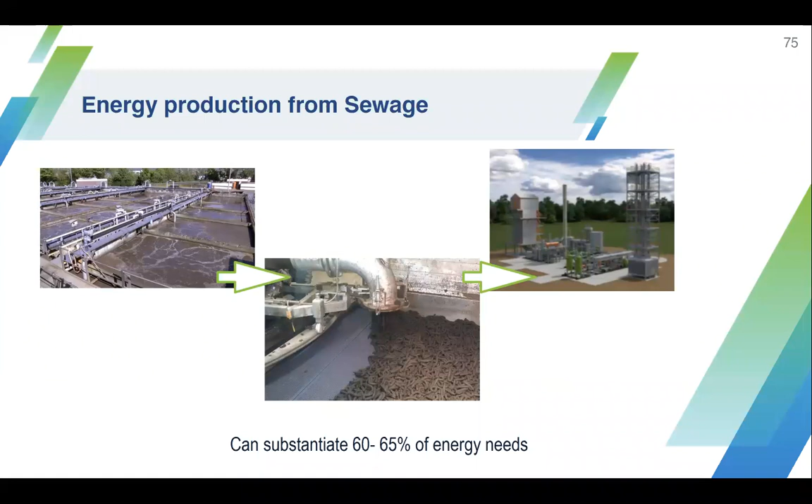Then you add other controls, another 20%, so 85% you can make it self-sustainable. This is one of the greatest advantages for large-scale plants, because a plant should be large so that solid production also will be higher.

So coming back to that, the final part of this presentation is selecting the smart solution. The smart solution, as I told you, is selecting the right process, controls, and process approach. These are very important. So select the right process. Let us not simply follow a technology.

Our approach should be solution driven, not technology driven. Each and every technology has its plus and minus in some places. So we need to evaluate for that particular wastewater what type of needs are there, analyze that, and accordingly suggest and select the suitable process. That is the first step in the smart approach.

Then monitoring parameters is very vital. Monitoring the parameters is critical, because we should know at what stage the plant is performing, or if the plant is performing well or not. We need some monitoring parameters, at least the basic ones, so that if there is a problem we will be able to address it and recover faster. This is the second approach.

And the third approach is analyze and control. Not only monitor, but see whether you could control these parameters and achieve the energy reduction, whatever possible.